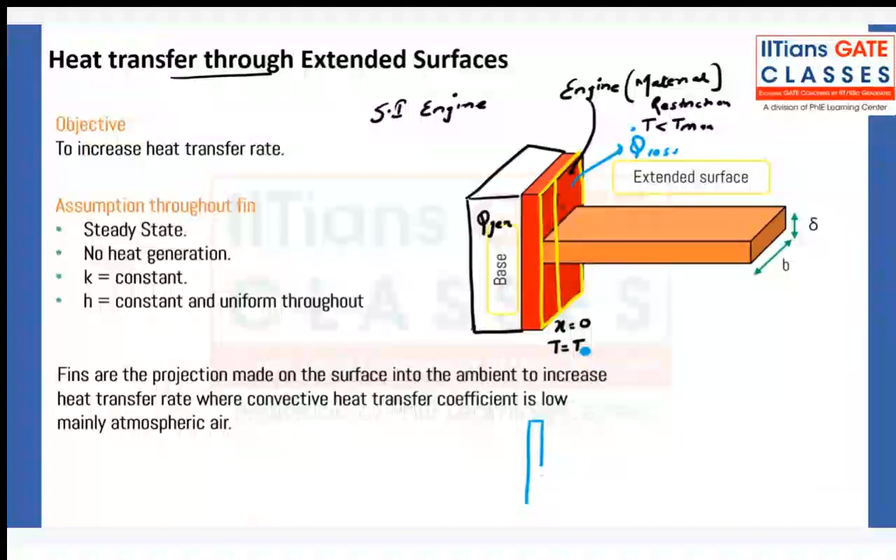How can you do that? By allowing the heat transfer to happen. Whatever heat is generated should be lost as heat, so that you maintain that body at a certain temperature T naught. This is what you want to maintain. So you can only allow this simple body - for example, this is your body - and let it allow the heat loss. The only area responsible for heat loss is this area.

Now, what can we do? We know conduction heat transfer is proportional to thermal conductivity, area, and temperature gradient. So we can increase the conductivity, but this engine is made of a certain material, so you cannot change the conductivity of the engine material. So what can you do? You can add an extended surface here like this, now using a material of higher thermal conductivity. So now conductivity is increased, area is increased, and heat transfer through conduction will increase.

So now the design of fins could be done in a way that it will allow the desired heat transfer - I need to transfer this much heat so I can maintain my temperature T naught. That is why you use extended surfaces, not just one - you use many surfaces here. I have made just one, but there will be a fin here as well, and another fin here as well. So many fins will be there.

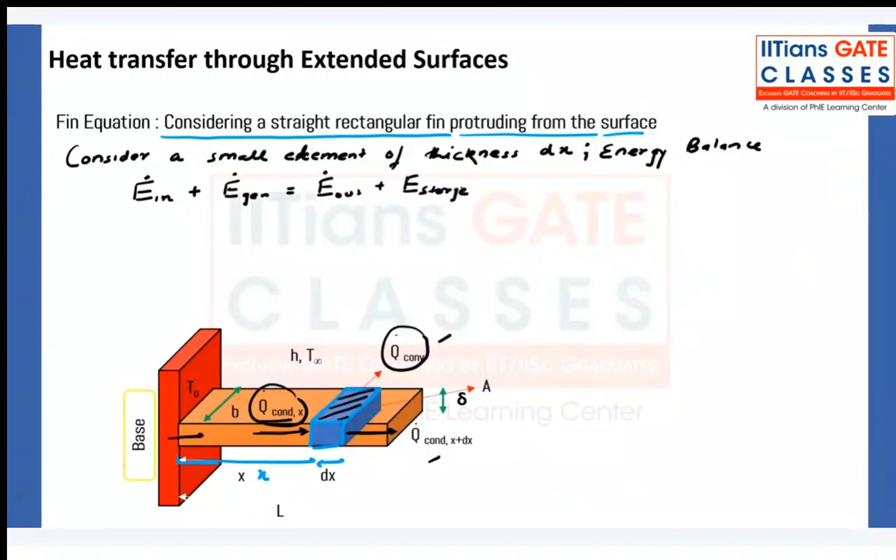Now we all know, we have assumed what? No heat generation. There is no heat generated inside the fin, so this is zero. And then we have assumed steady state, so that means there is no accumulation of energy inside the body, because if there is accumulation, temperature will change at that particular location.

So this is zero. Now we are left with energy dot in is equals to energy dot out. Now what is going in? Q dot x is going in. What is going out? Q dot x plus dx plus q dot convection is going out.

I can also expand this as q dot x, and this I can write as q dot x plus del by del x of q dot x, dx, plus q dot convection. So what do I get here? This and this get cancelled. This is del upon del x of q dot x, dx, plus q dot convection is equals to zero.

Now what can I do? I can expand this. How can I expand this? Del upon del x, it is conducted, what is it? It is only heat conducted that is coming in. So minus k, a, dt by dx, plus h, area. Now always remember, this is perpendicular area, this is the area of heat transfer, surface area. In this case it will not be the same.

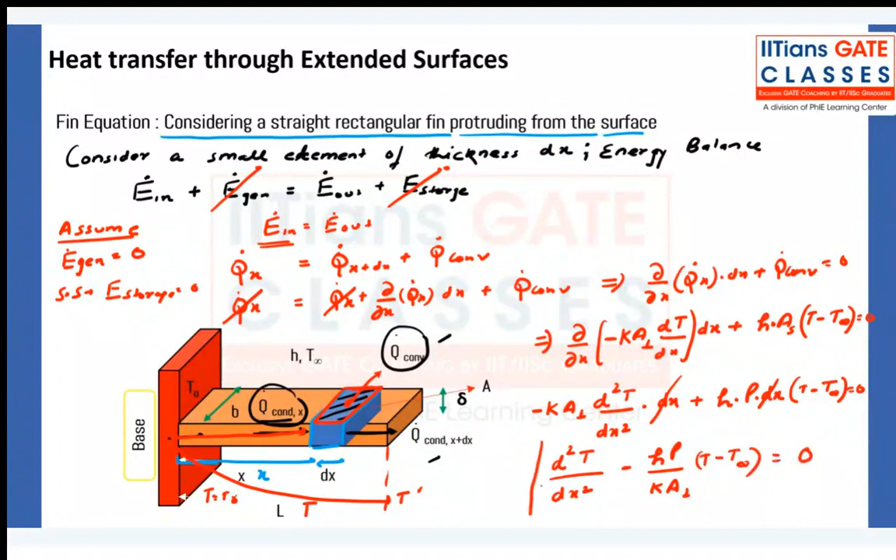Now tell me, do you have any problem with this equation? No, right? Okay, very nice. I have just rearranged the equation, divided everything by k, a, and also taken minus out. So I have just simplified it.

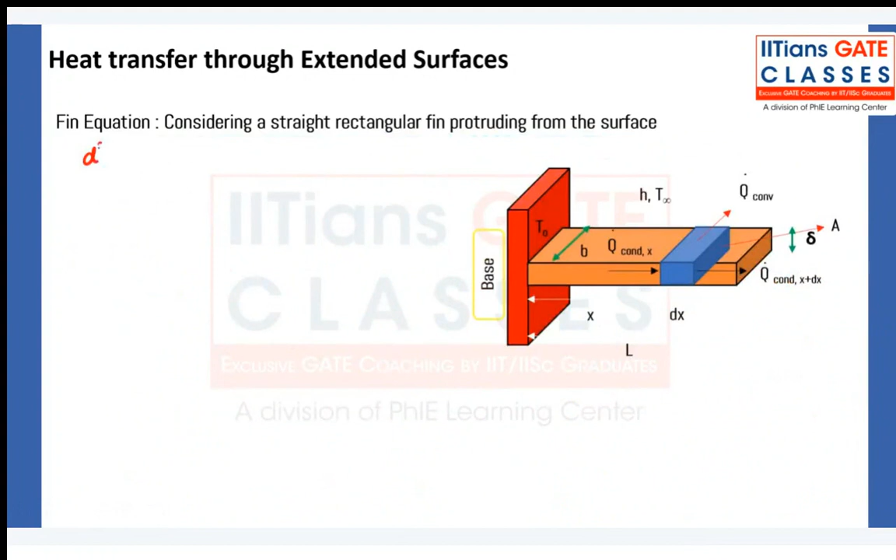Now let me take this equation ahead. So my equation is d square t by dx square, minus hp by k perpendicular area, t minus t infinity, is equals to zero. Very nice, very nice. Okay, chalo.

Now let us assume that t minus t infinity is equals to theta. This thing I have assumed as theta. Okay, chalo, I have assumed it theta.

Now if I differentiate this, dt with respect to dx, you see t infinity is independent of x. T infinity is the temperature of the fluid, whatever temperature the air is, it is the undisturbed temperature of the fluid. It is not affected by whatever heat transfer happens. You know the concept of thermal reservoirs, right? So air is a thermal reservoir. Whatever heat is absorbed by the air, the temperature of the air will not change.

The temperature of air will not change, so T infinity is constant, meaning dt by dx equals d theta by dx. I can also differentiate again: d square t by dx square equals d square theta by dx square. One more assumption I am taking: m square equals hp upon ka.

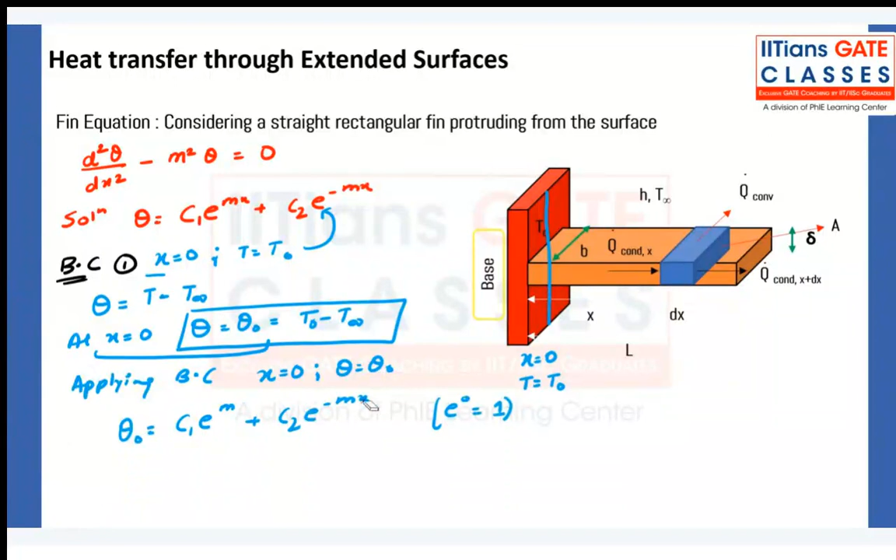Now we all know e to the power 0 is equals to 1. So I need to put 0 and 0. So this will become theta naught equals C1 plus C2. So whenever you use this boundary condition, this will be your equation A. Is this clear?

Now we have two constants C1 and C2, so I need one more boundary condition. Second boundary condition will depend on the type and design of fin. What kind of fin you are taking?

So the first boundary condition will remain same, and equation A will remain same. This equation will remain same. First boundary condition, which is either this or this, will remain same and equation A will remain same. Now the boundary condition 2 will vary depending upon the type of fin that you are using.

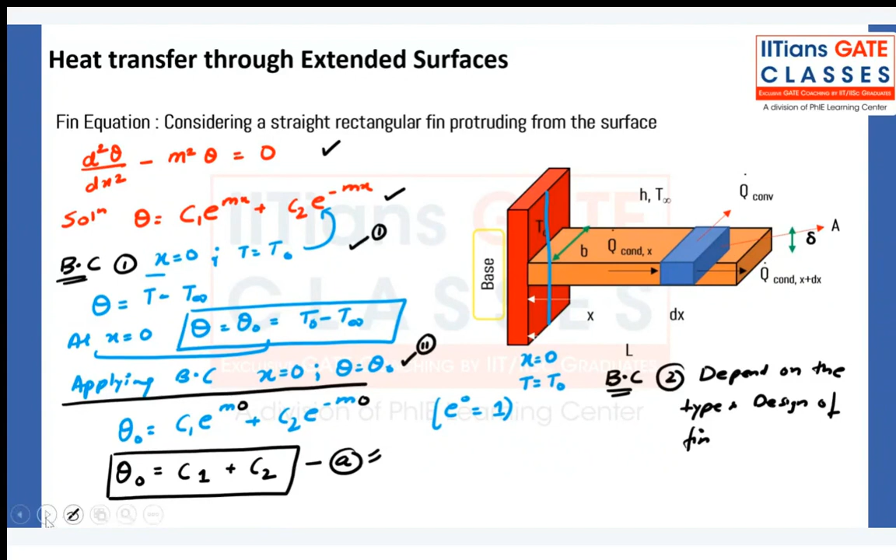Okay, this I don't need. This is the summary of what we have done till now. So this is my differential equation, and this is the theta that I have assumed, and m I have assumed this.

Okay, m key unit you will get when you put the units and cancel the units, you will get 1 by m.

Now this is the solution of this differential equation, and this is the common boundary condition that I have already shown you. The second boundary condition depends on the design of fin. By using the first boundary condition, I have already gotten the equation C1 plus C2, that is equation A. This is what we have discussed till now. Is it clear?

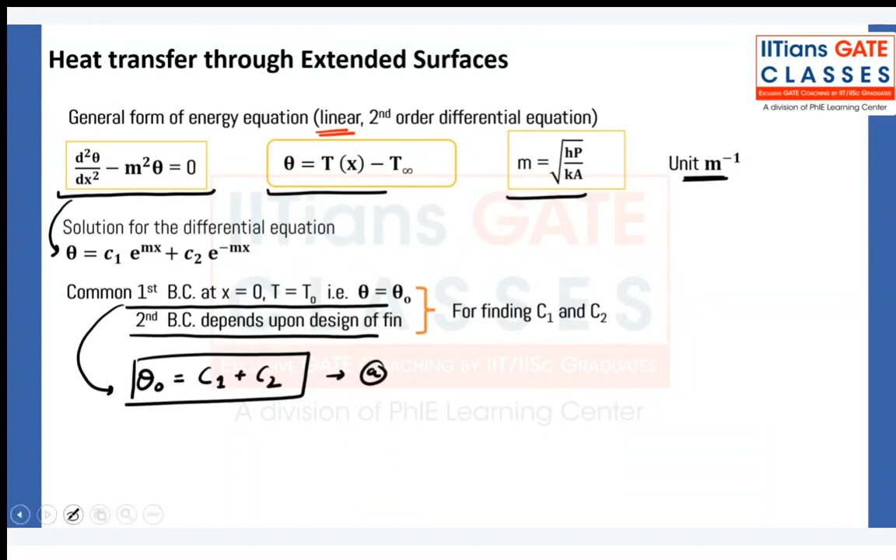Okay, now let's move ahead. Now I need the second boundary condition. So what will I do? That we will see later. But first I should know one more thing.

I know that m square is equal to hp upon ka. So m I can write as under root of hp by ka. So h and k will be given in the question, but I need to find out p by a.

Now two types of fin can be asked in the question: rectangular fin or pin fin. So if it is a rectangular fin, we all know what is the perimeter. Perimeter is 2b plus this, and area is b into this.

Now also what we can assume: if b is much greater than delta, then I can neglect delta.

What about pin fin? Again, perimeter by area. Perimeter is pi d, area is pi by 4 d square, or pi r square, whatever you want to call it. When you cancel this, perimeter per unit area is equal to 4 by d.

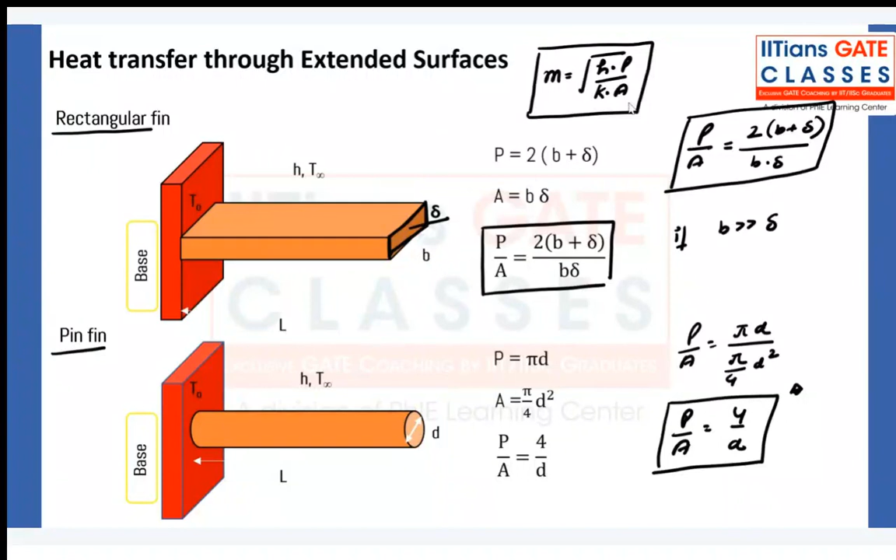Now let us move on to the second boundary condition, that depends on the design of the fin, what kind of fin you are using.

Now the first case is infinitely long fin. So what is happening, sir? This is your body, and this is your fin. Now this fin is very long.

Here I know, at this surface x is equal to 0, t is equal to t naught. But as this length is increasing, conduction is happening, convection is happening, conduction is happening, convection is happening. Now when your length is infinite, that means all the heat transfer will be given away to the environment.

So what will be the temperature here? Tell me. Yes, very nice, T is equal to T infinity. All the heat is rejected because of infinite length. So at the end, at this point, x is equal to infinity, length is infinity, and T is equal to T infinity. Very nice. So now what will we do?

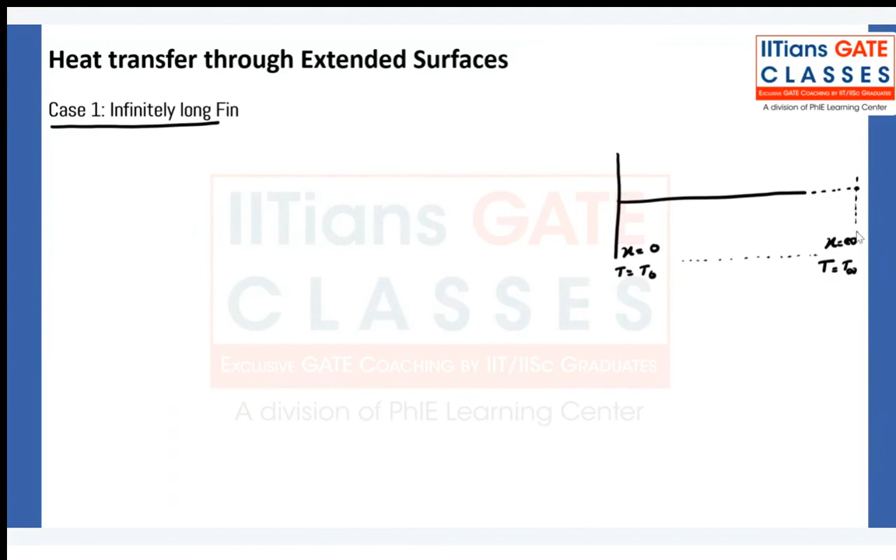We'll start with the basic equation. What is the basic equation? You should remember this as it is. I have solved it for you, but you need to solve it as many times so that it is remembered by you just like this. Okay, this is my differential equation.

Solution. What is the solution of this? Theta is equal to c1 e to the power mx plus c2 e to the power minus mx. Now I need to find out c1 and c2, m square.

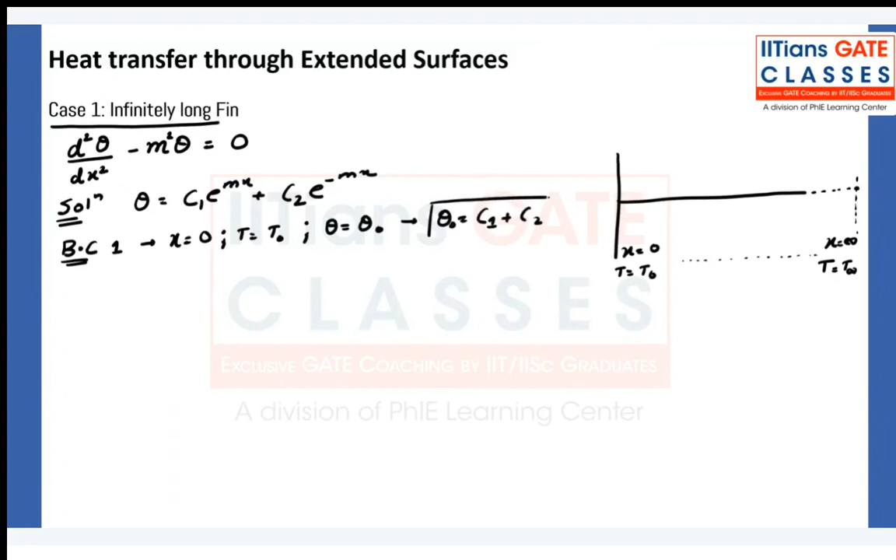Okay, so I need to find out C1 and C2. I'll apply the boundary conditions. First boundary condition: at x equals 0, t equals t naught. Theta is equals to theta naught, and the equation I get is theta naught equals C1 plus C2. This is equation A.

Now the time has come for the second boundary condition. Boundary condition 2: at x equals infinity, T equals T infinity. Now what is theta? Theta is equals to T minus T infinity. So how much will theta be in this case? Zero, yes, it is zero.

Theta will be 0. Let me apply this boundary condition in the solution. Theta is equals to 0, C1 e to the power mx infinity plus C2 e to the power minus m infinity. So e to the power infinity, what is this? Any power of infinity of anything will be equal to e to the power infinity, which will be infinity. And e to the power minus infinity is 0.

So I'll get 0 equals C1 times infinity plus 0. So C1 equals 0 upon infinity. Anything divided, if the numerator is 0, whatever you divide with, it will be 0. So C1 is equals to 0.

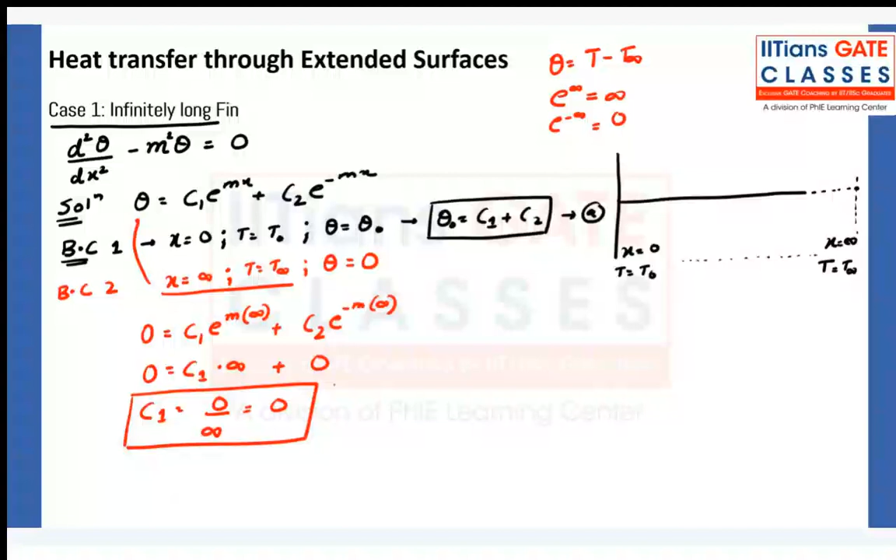Now what can I do? I can put C1 here, and C2 is equals to theta naught. So now I got C1, I got C2, I can place it here in the solution. Let me put C1 and C2 into the solution.

This is theta itself. C1 is 0, plus theta naught e to the power minus mx. So theta upon theta naught is equals to e to the power minus mx. This is basically your temperature distribution equation. Why? Theta is equals to T minus T infinity, and theta naught is T naught minus T infinity, is equals to e to the power minus mx.

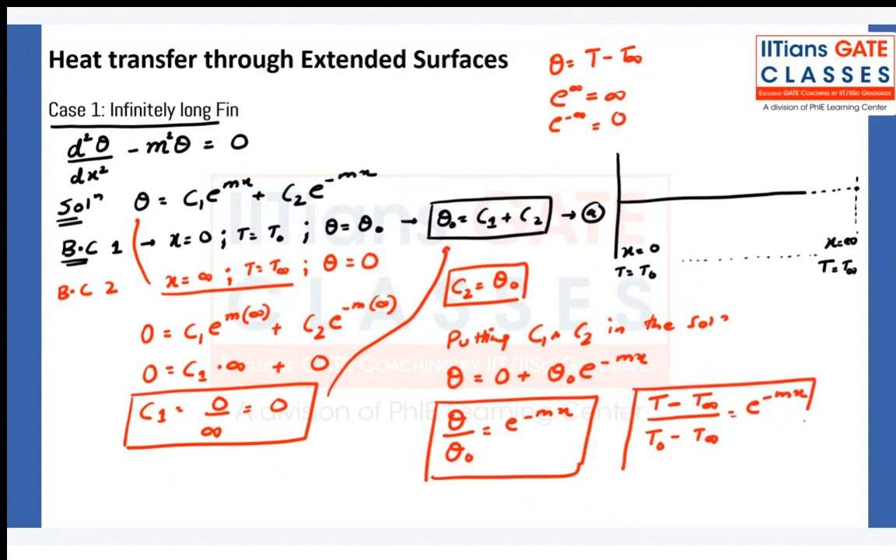So this is your temperature distribution equation for infinitely long fin. Is it clear? Okay, so this is my temperature distribution equation for infinitely long fin. Now I need to find out the heat transfer. So what is the heat transfer? I need to find out this.

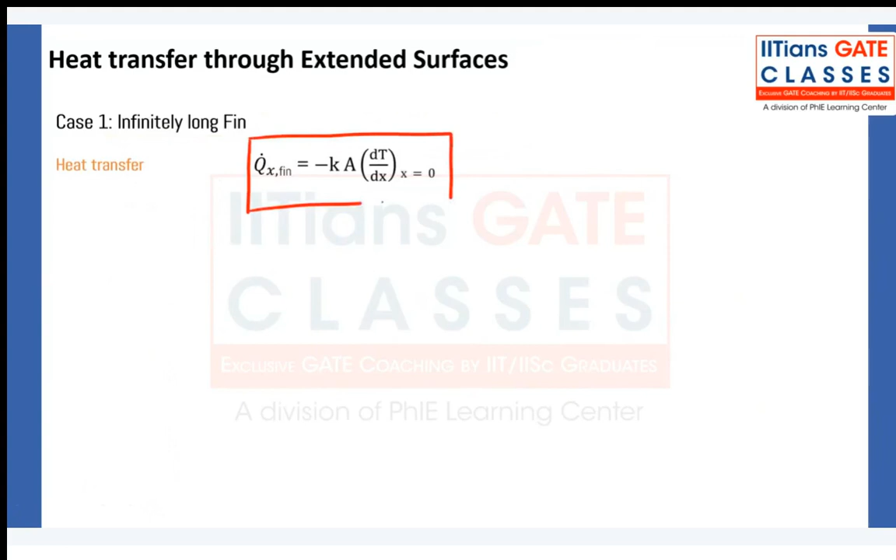How much heat is getting transferred at x equals 0? At this body, at x equals 0, how much heat is conducted? How much heat is coming in, how much heat is conducted in the body? Q dot conducted in the fin. So whatever is conducted will either be convected here or convected here, and in the whole body it will be conducted.

Yes, I can. Yeah, this is the last slide. Any doubts, Sahil? Okay, let us move on then.

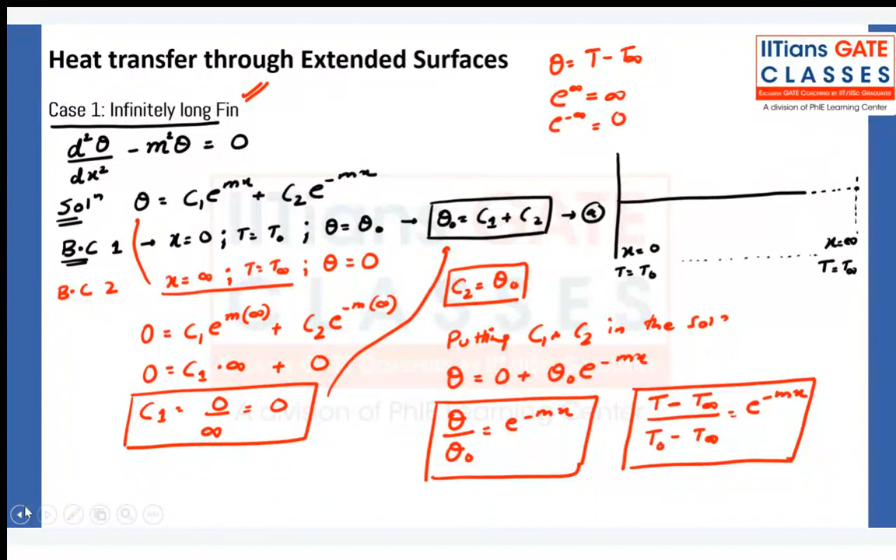So in order to find out heat transfer, I need dt by dx at x equals 0. How do I find out? Look, this is my temperature distribution equation. Can I say theta is equals to theta naught e to the power minus mx? Or can I also say T minus T infinity is equals to T naught minus T infinity e to the power minus mx? From here I can find out temperature: T infinity plus T naught minus T infinity e to the power minus mx. Now I need to find out dt by dx.

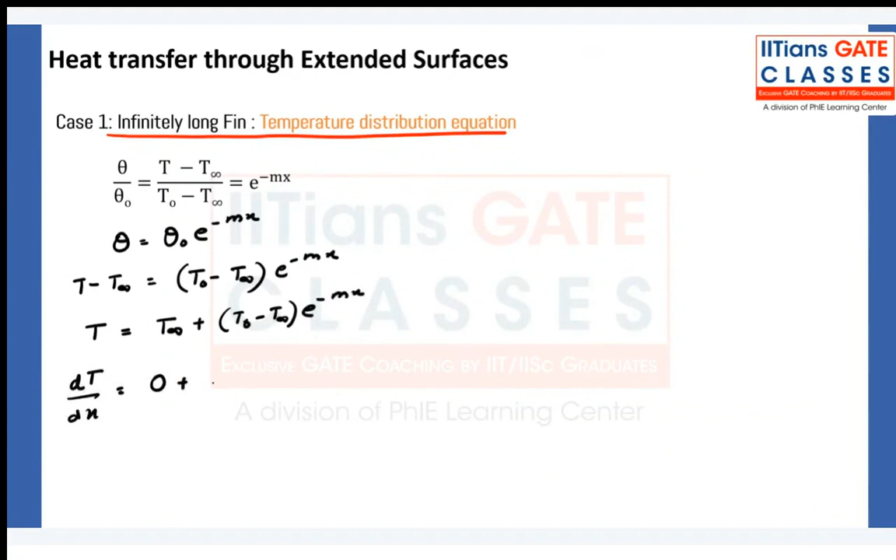This is constant only, so this will be 0. Now I need to differentiate this: T naught minus T infinity e to the power minus mx. What will you get here? Tell me quickly, what is the differentiation of this? Yes, very nice, minus m. So dt by dx is equals to minus m. Now can I write theta naught here? Yes, I can write theta naught e to the power minus mx.

Now in order to calculate heat transfer, what do I need? I need dt by dx at x equals 0. So what will I do? Minus m theta naught e to the power minus m times 0.

Okay, so what is the value of this? E to the power 0 is 1. You will get dT by dx at x equals 0 is equal to minus m theta naught.

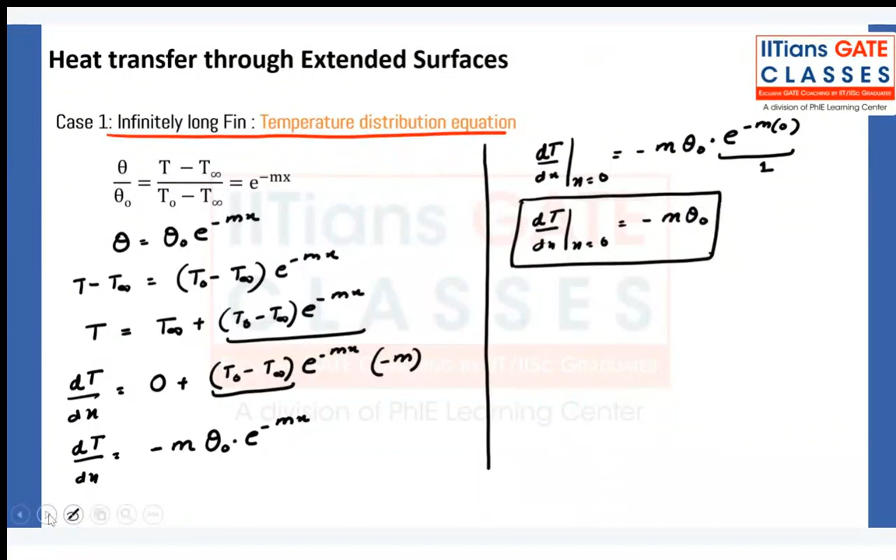Okay, so this is what I have gotten. Now I can just insert it here. So if I need to find out qx of fin, which is conduction heat transfer, minus kA, and this is what I got, minus m theta naught.

We have calculated dT by dx at x equals 0 is equal to minus m theta naught. Now this is plus kA. M is what? M is under root hP by kA, and this is theta naught. So if you cancel this, you will find out under root hP kA theta naught.

Let me write theta naught in terms of temperature because it is more convenient for us, because we know things in terms of temperature: T naught minus T infinity. And this is how you can calculate heat transfer in infinitely long fin. Unit is watts. Is it clear?

Yes, very nice, very nice. Chalo, let us move on to the next case.

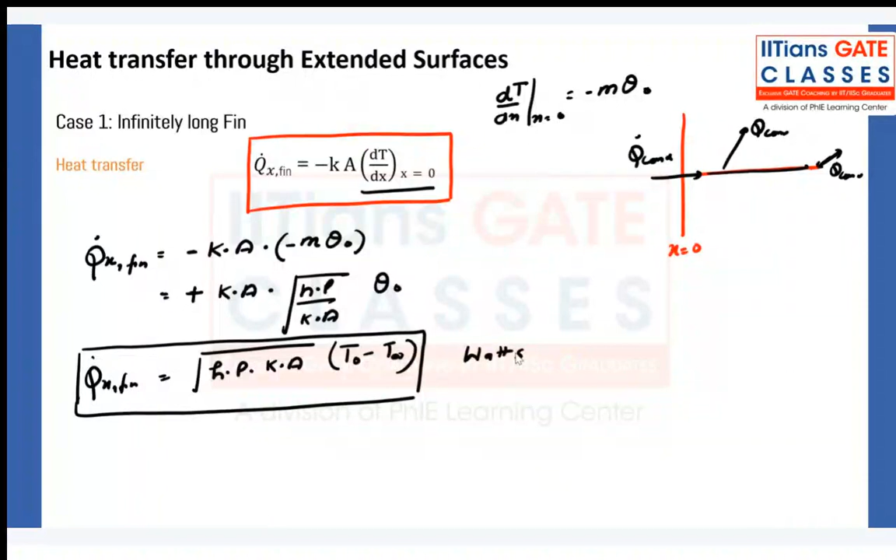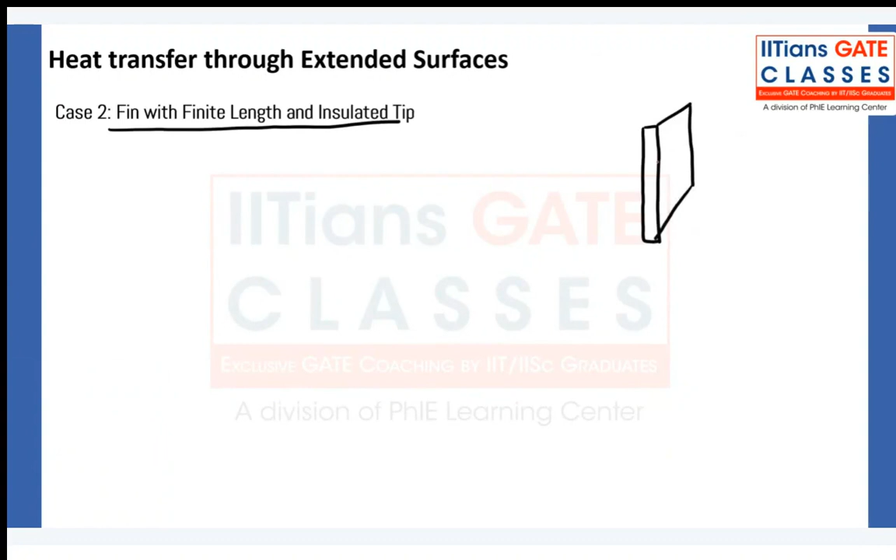So, fin with finite length and insulated tip. What does it mean? Look, this is your body, whatever body it is, engine body or whatever, and you have taken a fin here. Now, finite length means, look, here I know, here I am very sure x equals 0, T equals T naught. And when finite length means x equals L, so now the tip, this tip is insulated.

That means because it is insulated, so Q dot conduction will be equal to 0. Now what is Q dot conduction? Minus kA dT by dx at x equals L is equal to 0. So at x equals L, dT by dx is equal to 0.

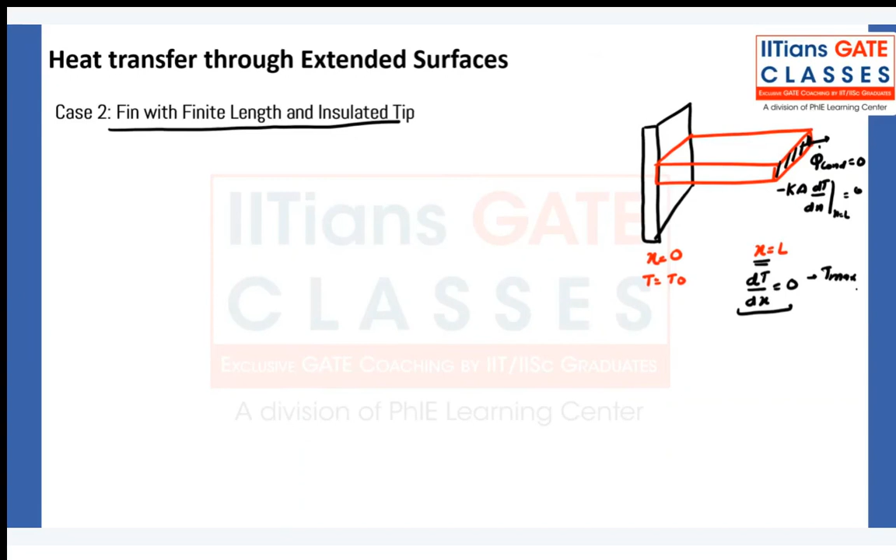And what do we know about this? Here you will also get the maximum temperature. Here, yes, no heat transfer, but the temperature will be maximum because this is the condition. At dT by dx meaning the variation of temperature with respect to x, where dT by dx equals 0, you will get Tmax as well. So you already know the location of your Tmax.

Okay, chalo. Now, so let's start from the beginning. So write the equation again: the differential equation was d squared theta by dx square minus m squared theta equal to 0. What is the solution of this? Solution is theta equals c1 e to the power mx plus c2 e to the power minus mx. Okay, let us apply boundary condition.

First boundary condition: x equals 0, T equals T naught, and theta equals theta naught, and we have gotten theta naught is equal to c1 plus c2. This we already know, no discussion needed for this. Now the second condition.

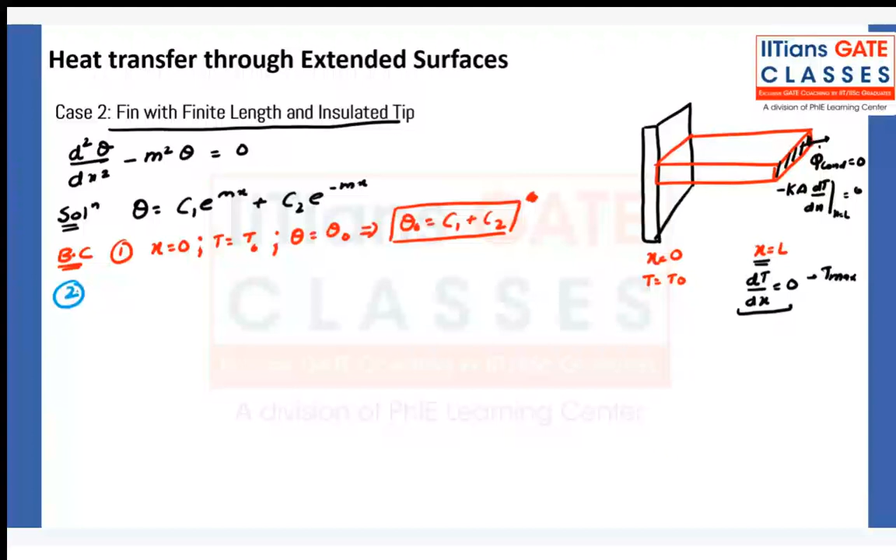Second boundary condition is at x equals L, dT by dx is equal to 0. Can I also write it as d theta by dx equals 0? Any problem? Okay, very nice. Before we move ahead, let me tell you one more thing.

Look, if nothing is given in the question about what type of fin, we will cover 3 cases of fin. Next will be uninsulated tip. But if nothing is given in question, then you assume that this is the case you have to assume, otherwise they will say infinitely long fin, or otherwise they will specifically mention something. If nothing is mentioned, then you assume it is this fin, and you start making calculations according to this. So it's very important that you focus on this.

Now chalo, now I need to find out d theta by dx, and I need to put it equal to 0. Then I will get c1 and c2. Okay, chalo, theek hai, so differentiate this. Let's say d theta by dx equals m c1 e to the power mx, and because minus m will come outside, so let me write it here, minus m c2 e to the power minus mx. Is it okay?

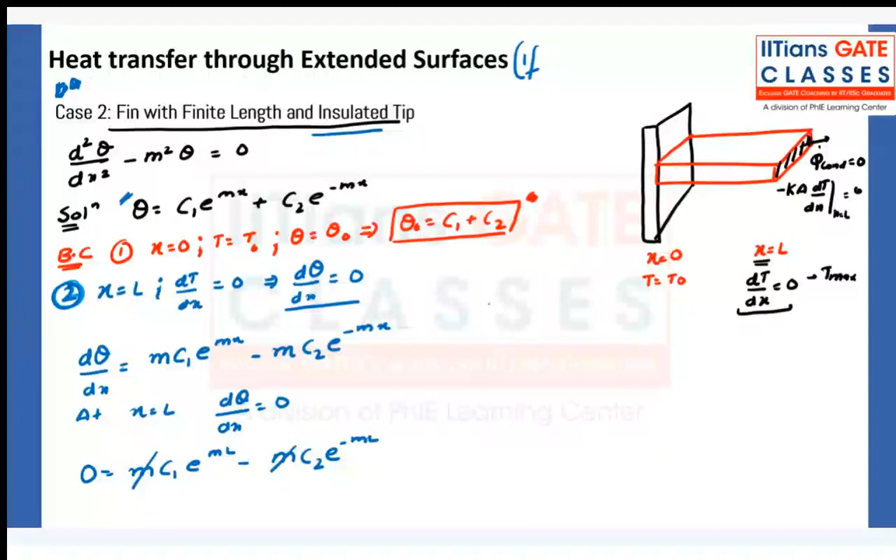Now m you can take common and it will go out and get cancelled. What am I left with? I am left with C1 e to the power mL minus C2 e to the power minus mL is equals to 0. This is what I am left with. Is it clear?

Now I need to find out C1 and C2. Now because it's one equation, two unknowns, but I already have one equation: theta naught is equals to C1 plus C2, by applying boundary condition 1. So can I say C1 is equals to theta naught minus C2? I can say this, right? So let me substitute it here.

Theta naught minus C2 e to the power mL minus C2 e to the power minus mL is equals to 0.

Now you can take C2 out, simplify it, and you will get C2 is equals to theta naught e to the power mL upon e to the power mL plus e to the power minus mL. This is what you will get for C2. And when you substitute C2 here, you will get C1 is equals to theta naught e to the power minus mL, and the denominator will remain the same. Is it okay?

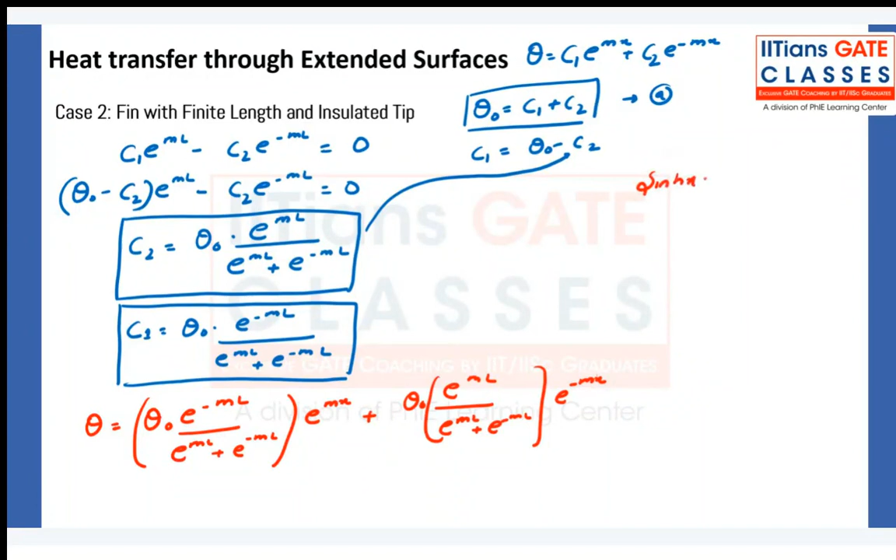We know sine hyperbolic x is equals to e to the power x minus e to the power minus x by 2, and cos hyperbolic x is equals to e to the power x plus e to the power minus x by 2. And for tan hyperbolic, you can simply divide them, and you will find e to the power x minus e to the power minus x upon e to the power x plus e to the power minus x.

So I can simplify my equation in terms of cos and sine. If I change the exponentials into cos and sine, I will get theta, and theta naught you can take out from this equation.

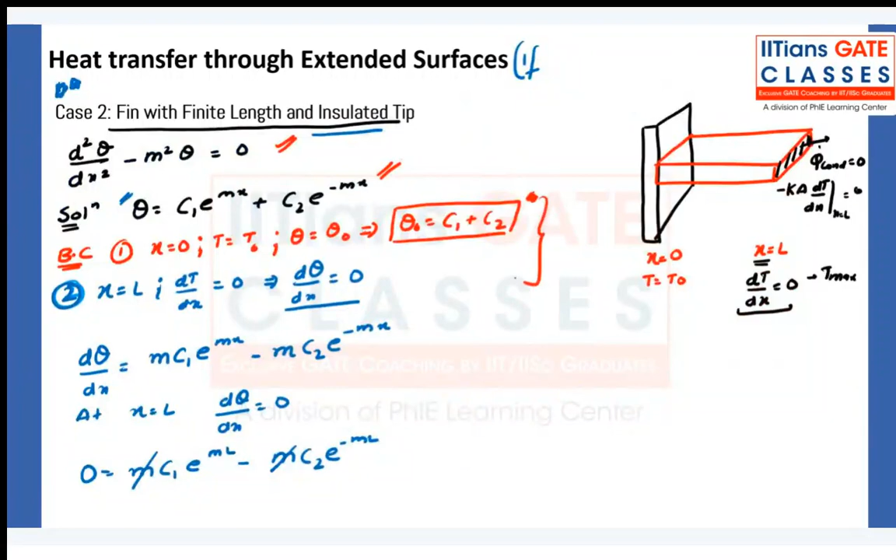So theta upon theta naught is equals to cosh m(L minus x) upon cosh mL. This much is more than enough for you. If you know what the boundary conditions are, you do not even need to remember the constants, you do not need to remember this. Only the differential equation, its solution, and these two boundary conditions. After that, you need to know this temperature distribution equation. Is it clear?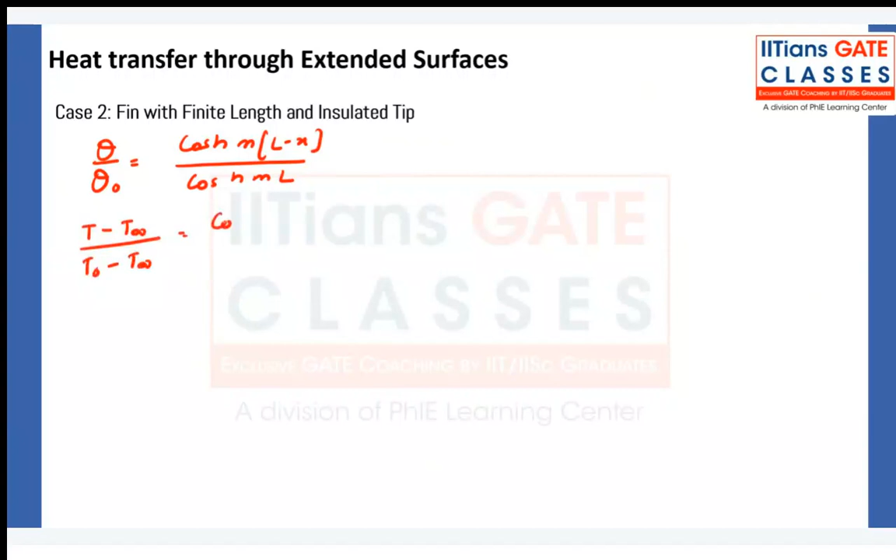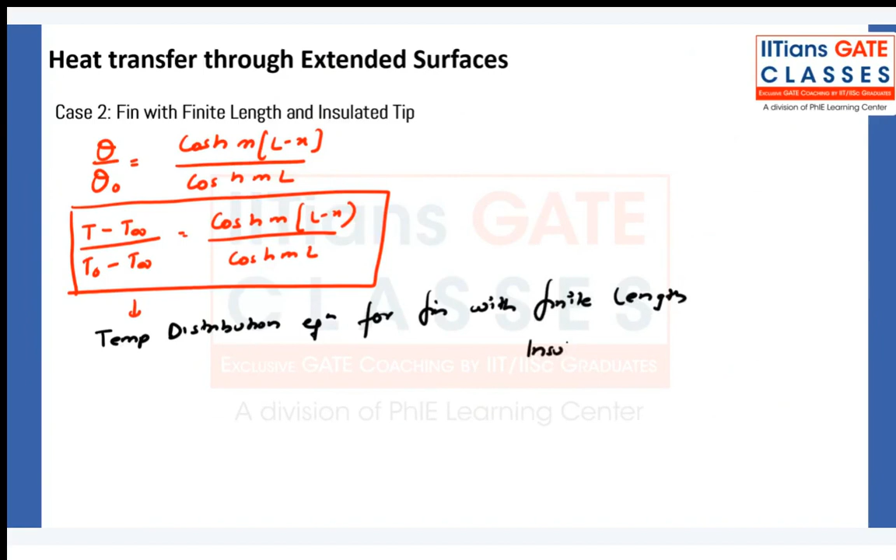So what do I get? I get theta upon theta naught is equals to cosh m(L minus x) upon cosh mL. And I can also write t minus t infinity upon t naught minus t infinity is equals to cosh m(L minus x) upon cosh mL. Now this is my temperature distribution equation, for fin with finite length and insulated tip. Only in these conditions can you use this boundary condition. Is it clear?

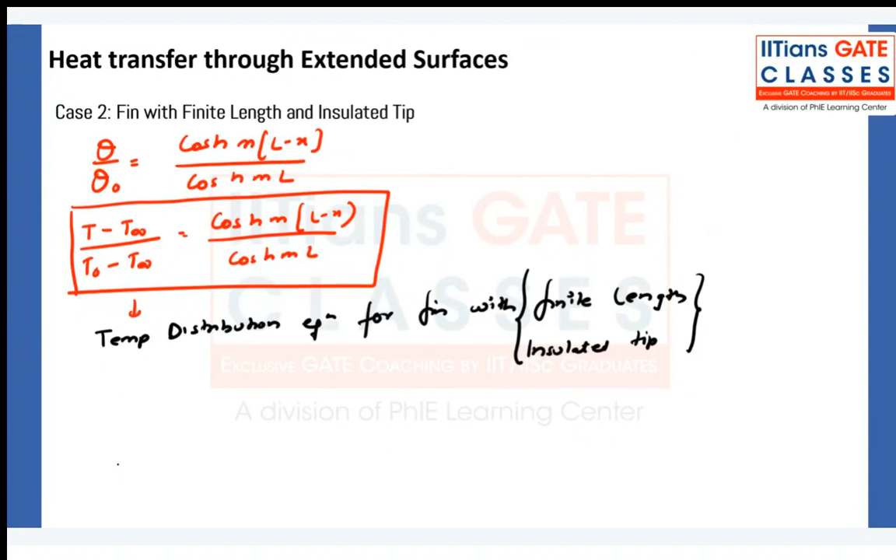So as we know, this is my boundary, this is my temperature distribution equation. Now again, like we did previously, I need to calculate heat transfer - how much heat is getting transferred at x equals 0. So what will I do? I need to find out dT by dx at x equals 0, so that I can substitute that in the heat transfer equation and calculate the heat transfer. In a question, you need to directly calculate using that formula.

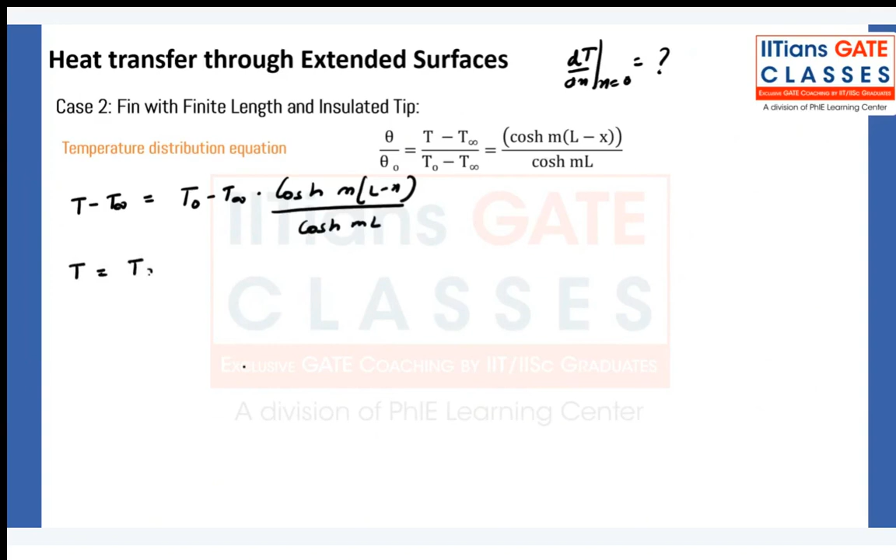So I can write T naught minus T infinity cos h m(L minus x) upon cos h mL. I can also write T equals T infinity plus T naught minus T infinity cos h m(L minus x) upon cos h mL.

Now let me differentiate dT by dx. This term will become zero, plus it will remain same because it is in product, but it is a constant. Now, can you tell me what is the differentiation of cos h m(L minus x)?

Cos hyperbolic m(L minus x) differentiates to sin h m(L minus x) into m or into minus m? Yes, minus m, very nice. And this is constant, this is same. So what can I do? Can I write dT by dx equals minus m theta naught sin h m(L minus x) upon cos h mL? I can write this - any doubt? Is that okay?

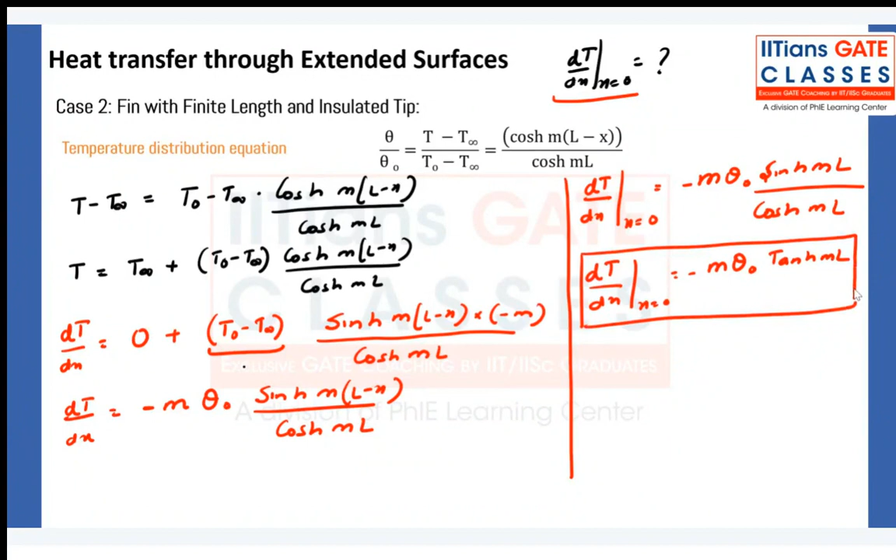Now this is what I need, so let's move ahead with this. I need to put this here. So what do I get? dT by dx at x equals 0 equals minus m theta naught tan hmL. This is what I have found out.

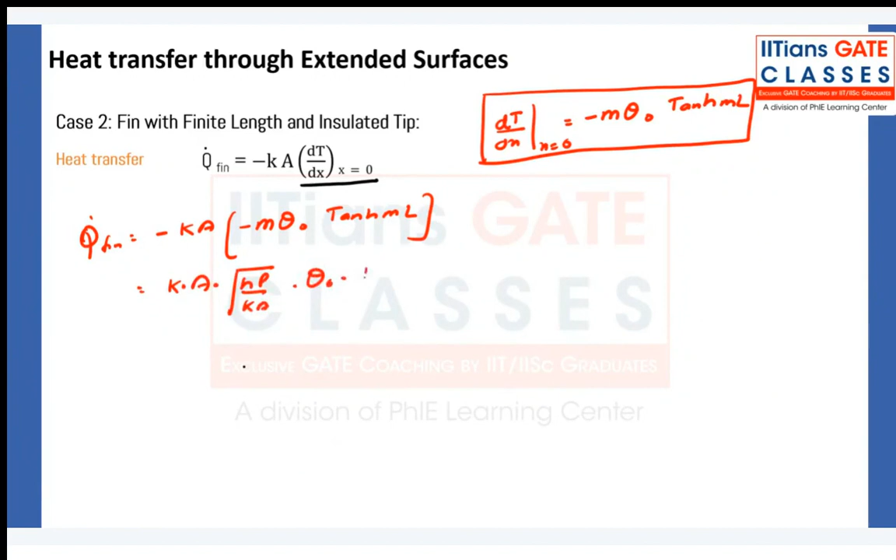So let me put this here. Q dot fin equals minus kA, and this is minus m theta naught tan hmL. So this is kA. M is under root hP over kA. So under root kA is there in the denominator, numerator is kA. So when you divide this, you will get under root hPkA theta naught tan hmL as Q fin.

And this is given in watts. So whenever you see a question on fins asking for heat transfer, use this equation. H will be given, K will be given, perimeter and area I have already told you the formulas for. Theta naught is T naught, meaning base temperature - it will be given to you. Theta naught equals T naught minus T infinity. So T naught is the base temperature, base material temperature - something like this they will give in the question. T infinity is ambient or fluid temperature, which will also be given in the question.

Calculate m. M equals under root hP over kA. P by A you know - I have given you the formulas - and length also you know. You can calculate heat transfer. Is this clear? Okay, very nice, very nice.

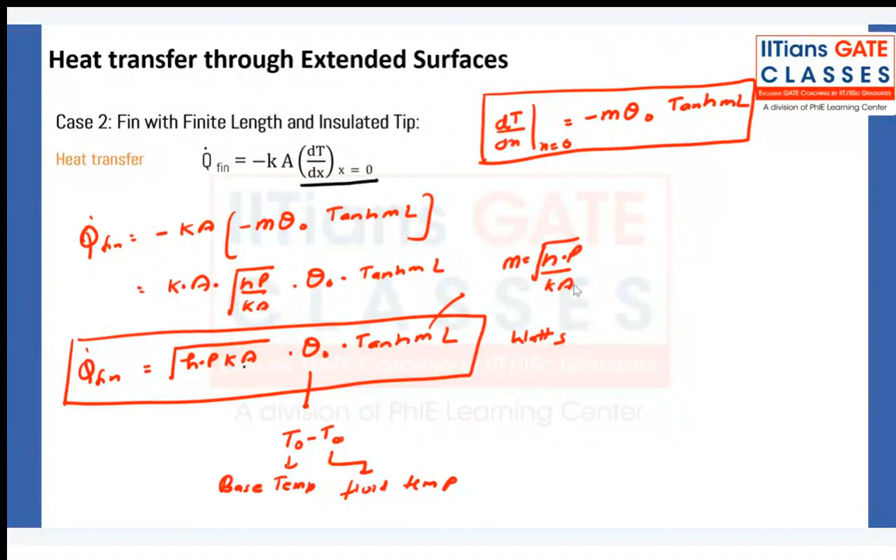Chalo, now the last case is fin with finite length and uninsulated tip. Now this case is very rarely asked. Most frequently, case second is asked - most frequently, so this is the first priority. Second priority is case first. And third is very rarely asked.

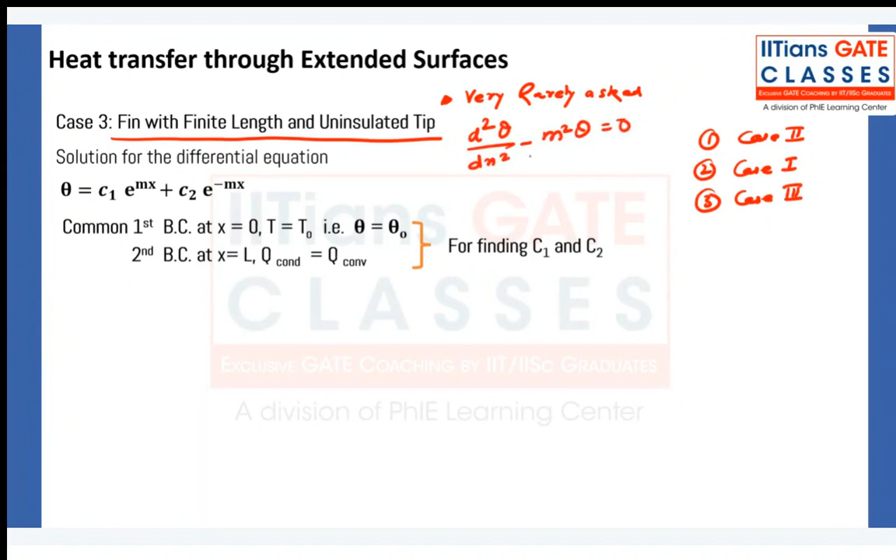Fin with finite length and uninsulated tip. So we already know that the differential equation is d square theta by dx square minus m square theta equals 0. This is my differential equation, and the solution of this equation is this. Boundary condition I already knew, and the second boundary condition is simple - this is my base material, and now this is my fin.

Now we know that here at x equals 0, T equals T naught. But at this point, x equals L, what is happening here? You see, conduction heat transfer is happening like this, and it is steady state conduction. In steady rate of heat conduction, rate of heat transfer will remain same. So at this point, whatever is conducted at this location, will be, because here we have fluid.

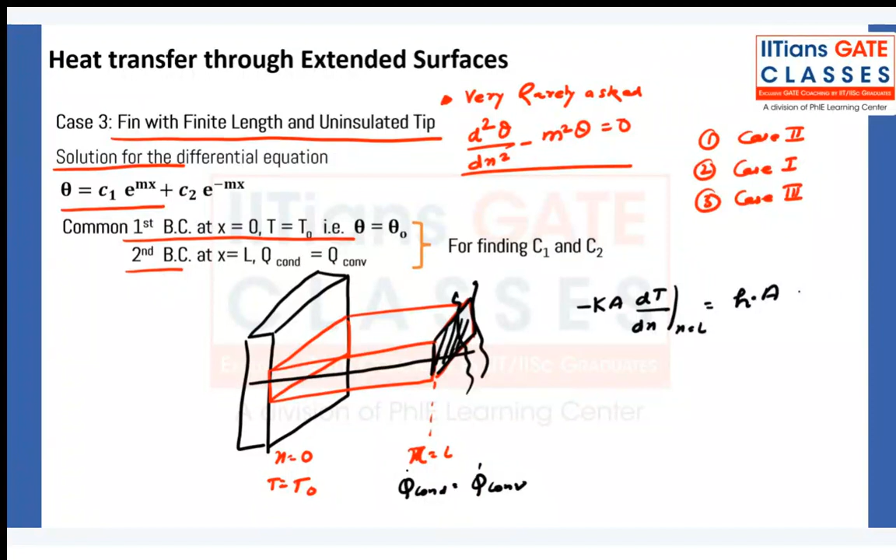Here we have fluid, so Q dot conduction equals Q dot convection. Now you can write the formula: minus KA dt/dx at x equals L, equals H times area. Now area will remain the same in both cases because this is the same area which is in contact with the fluid, and it is also the conduction area. Then T at L minus T infinity. So area cancels, and dt/dx at x equals L equals H upon K theta naught minus... something like this you can do, but it is not required.

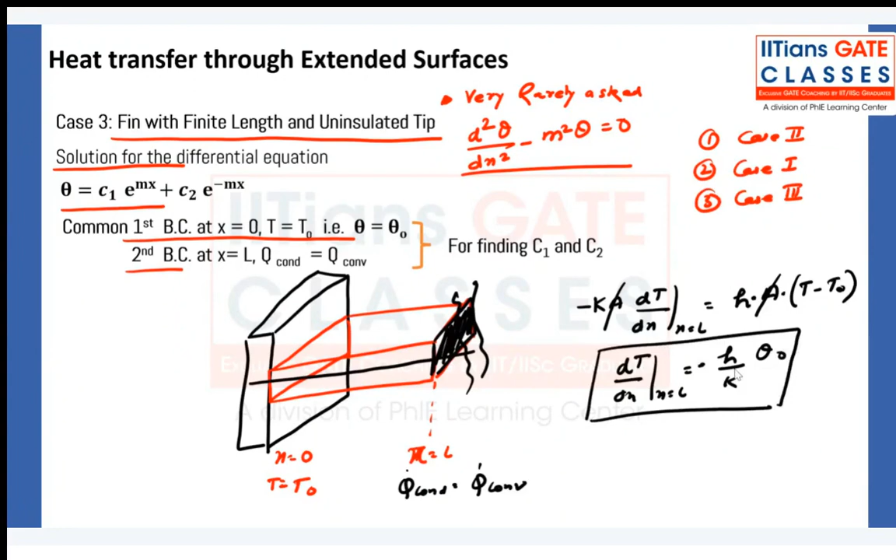A lot of derivation is needed for this, but that again is not required for us. And eventually, even after that, we will reach a very complicated formula. So what we do in order to simplify the analysis...

What will we do? We use the same temperature distribution as we used earlier for this uninsulated tip case. So we will do the same thing we did earlier.

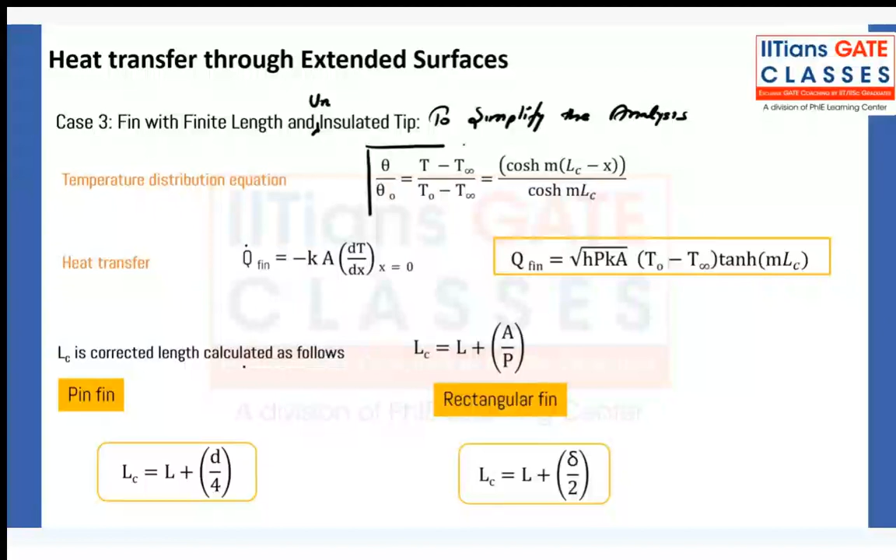So this was my temperature distribution equation. Only instead of L here and L here, I am using LC, which is called the corrected length. How we will calculate corrected length, we will see in some time. Now this is my temperature distribution equation.

This is my heat transfer equation, same as before, and this is the formula we calculated for the insulated tip, only here I have replaced L by LC. Now how do you calculate LC? LC is L plus A by P, area by perimeter, and we have already calculated perimeter by area earlier for rectangular fin and pin fin. So the same thing you can use here.

But just take care, you need to use LC. Very rarely this type of question will be asked, but even if it is, this much information is more than enough to solve it. There is no need of doing the derivation, and anyway, even if we do the derivation, in the GATE exam we do not use that formula we get after derivation, so there is no point.

Next is fin efficiency. We always know what efficiency means for anything: how close is it to the ideal condition? So fin efficiency equals Q actual over Q maximum. What is the actual heat transfer, and what is the maximum heat transfer possible?

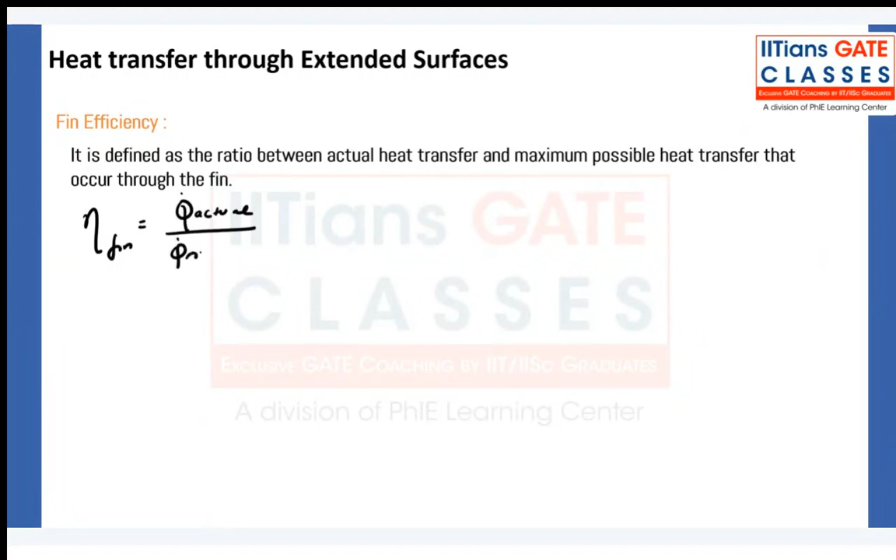Now you see here, look - this is your material, this is your base material. Okay, I don't need that, so I won't draw this.

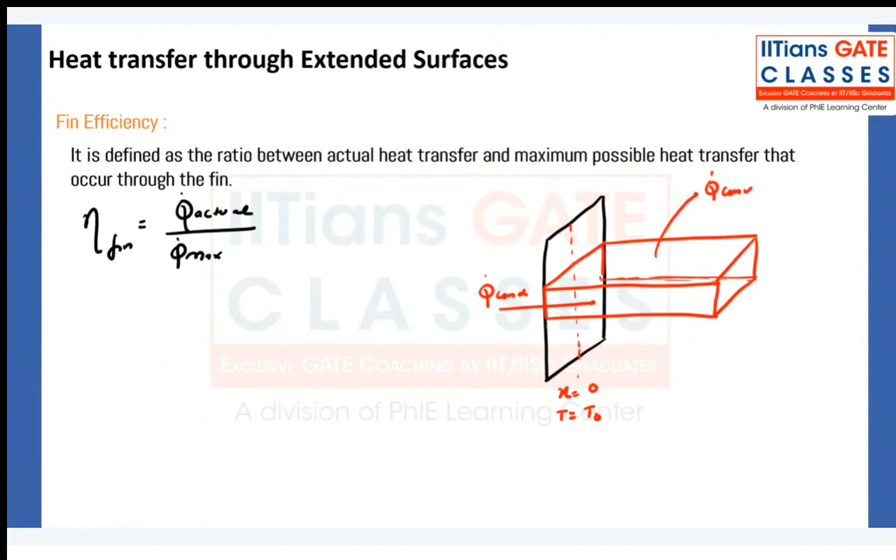So this is my fin. Now here, at this point at x equals 0, temperature is T naught, which is... not maximum temperature, but usually, because heat is going out - first heat is conducted, Q dot conducted, and heat is convected as well, Q dot convected. So what we do is say that heat is basically related to temperature: if here temperature is T naught, then temperature reduces as you move along, let's say it becomes T1, so T naught is greater than T1 usually.

So when will you get the maximum heat transfer? You see temperature is reducing. But what if the whole fin everywhere was at temperature T naught - then the same amount of heat will flow as with base temperature everywhere. Then you will get the maximum heat transfer.

So Q dot max is defined by assuming the entire fin is at root temperature, or base temperature - it is called base temperature, T naught. We assume it is at T naught everywhere.

Now, when will this happen? When can this situation possibly occur? It is possible only where... so in order that the temperature is T naught everywhere, would the conductivity need to be very high or very low?

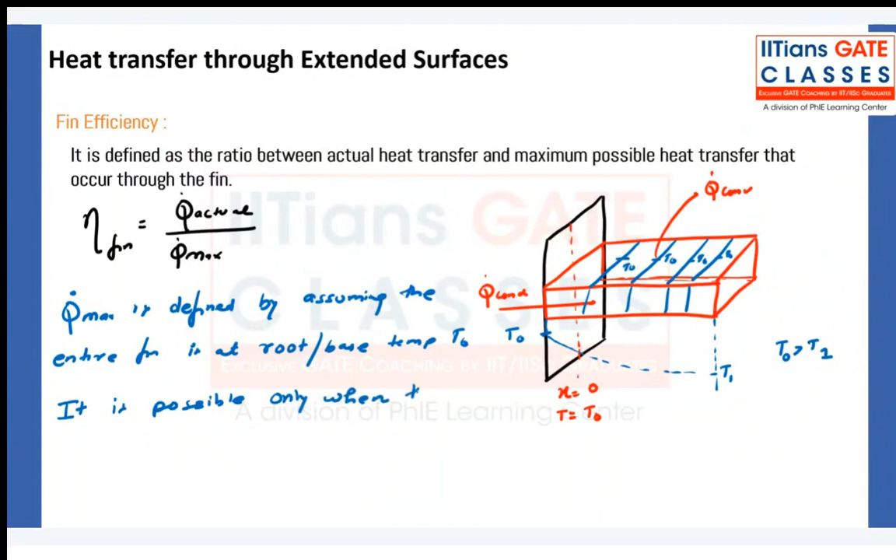Only when thermal conductivity is... no, we assume thermal conductivity as constant. But because temperature is reducing, heat transfer will change. So there will be heat transfer. Q dot conduction equals minus Ka dt by dx. So this is changing, temperature with respect to dx is changing. So it can only happen due to conductivity of the material. We assume in the analysis that conductivity is not changing with respect to x.

Now conductivity must be infinite, very very high conductivity, so that heat transfer... conductivity will be infinite so that there will be very fast heat transfer. And if the heat transfer is very fast, that means you will not get enough time for the reduction of temperature. Heat will flow very fast in the body. It is possible only when thermal conductivity K is infinite, but that is not possible anyway.

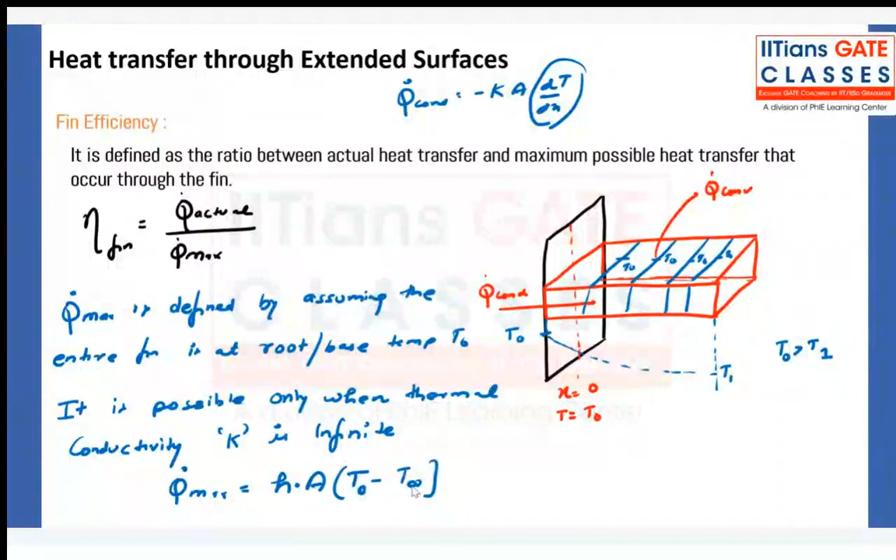Now, how do you calculate fin efficiency in the first case, which is infinitely long fin? I know that efficiency of fin is defined as Q dot actual upon Q dot maximum. We have just calculated heat transfer for infinitely long fin. What was it? Under root h p k a, times T naught minus T infinity.

And this Q max is h area T naught minus T infinity. So this will get cancelled. Now this area, if you remember, is perpendicular area with heat transfer, because when we defined q convection equals h a times T minus T infinity, area we took as perimeter by dx, and dx was cancelled. So this area is the perpendicular conduction area. And this area is different - this area is perimeter into dx. Now because we are talking about the whole fin, it is P into L.

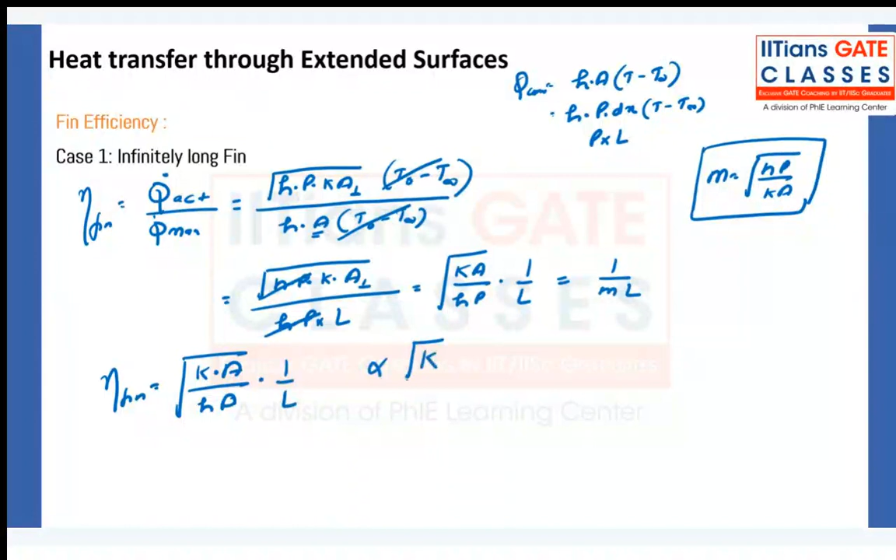Okay, very nice. Now let me write this formula one more time: is equals to under root Ka upon HP into 1 by L. So you see, efficiency is directly proportional to root of thermal conductivity, inversely proportional to heat transfer coefficient, and directly proportional to area by perimeter. Keep this in mind, we will discuss this later. And 1 by L. This is efficiency.

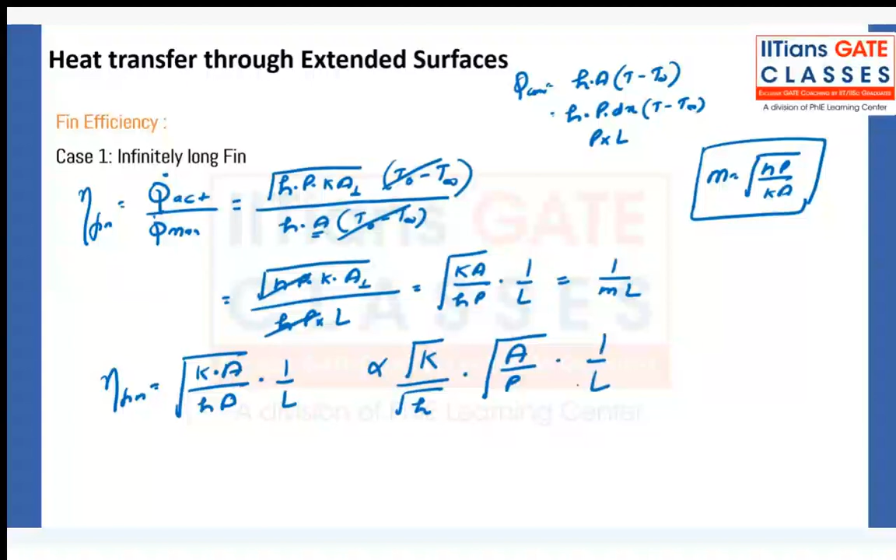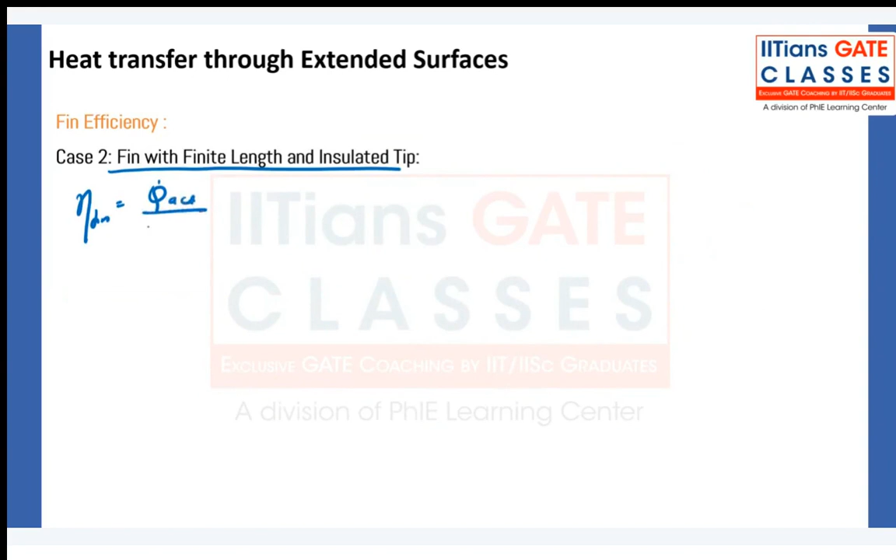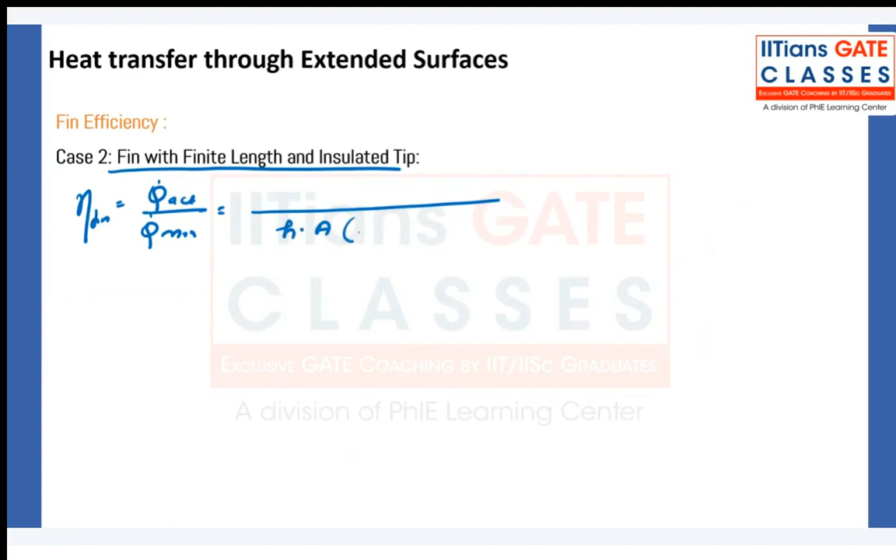Now, what about fin with finite length and insulated tip? Efficiency of fin is defined as Q dot actual upon Q dot maximum. Can you tell me what is Q dot actual for this case? I will write this H area T naught minus T infinity. Tell me very quickly - you will get a revision again here itself. What is the heat transfer actual in this case?

Let me read it: under root H P K A, yes square root HPKA. That seems correct, yes, that seems correct. Right, for both it is correct. Then T naught minus T infinity, which is theta naught as well, and tanh ML. Tanh ML, yes right, that is correct. So HPKA and T naught minus T infinity tanh ML. So again this I can cancel, length I will still be there. HP and HP will get cancelled, and I'll get tanh ML upon ML. So efficiency of fin equals tanh ML upon ML.

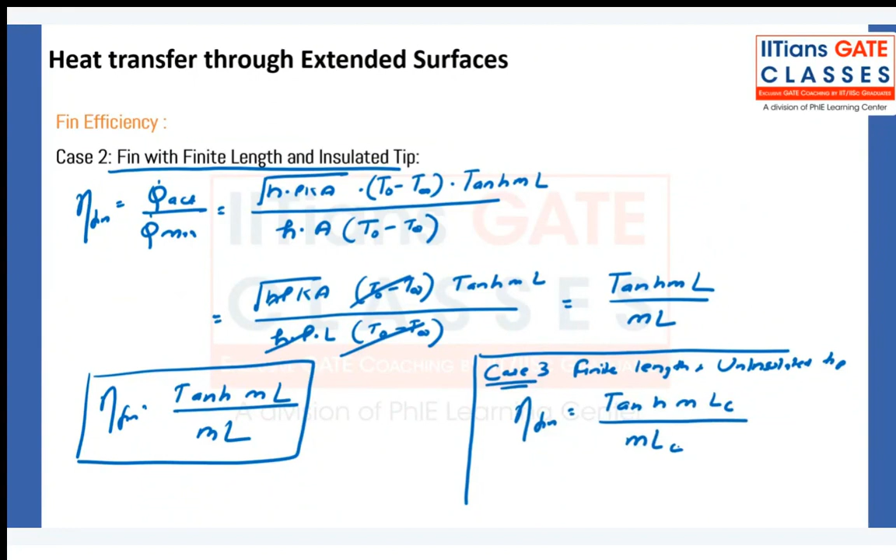Simple, okay. Let us move on to the last topic, which is fin effectiveness. Then we will see whatever questions they have asked till now.

Fin effectiveness tells us how much percentage increase. What does effectiveness mean? If I was doing something and then changed my routine, or changed my diet - for example, I am going to gym and my exercises are not very effective, so I changed the diet. That change in diet, how effective is it? How do I compare this? How do I compare what was my performance before that diet and what is my performance after the diet?

Effectiveness is basically defined as the ratio between heat transfer with fin and without fin. Effectiveness will tell you what is the heat transfer happening with the fin, and what was the original heat transfer without the fin.

It is not recommended that you use a fin if effectiveness is less than 2, otherwise there will be a cost involved in manufacturing the fins, adding the fins, fin material and other phenomena. If effectiveness is not greater than 2, a little heat transfer has increased by using the fin, but a lot of cost has already been given to design and manufacture that fin. So effectiveness must be at least greater than 2.

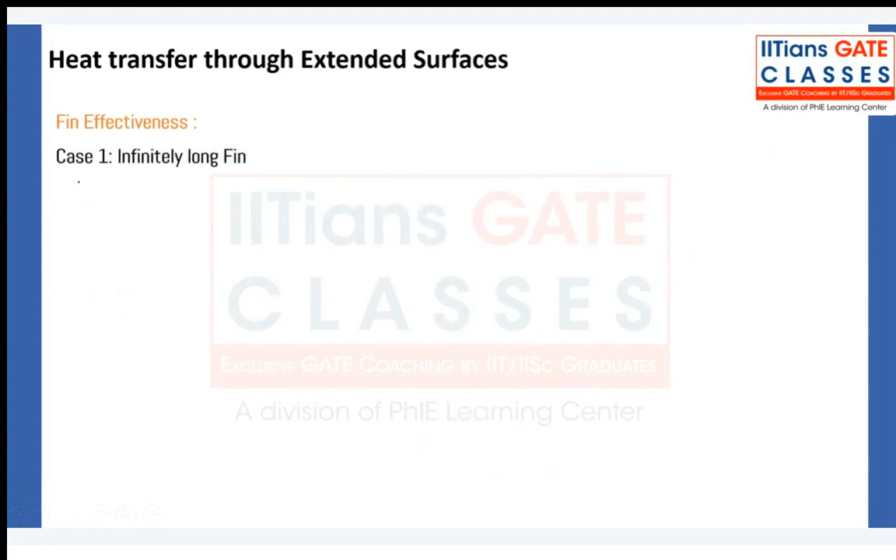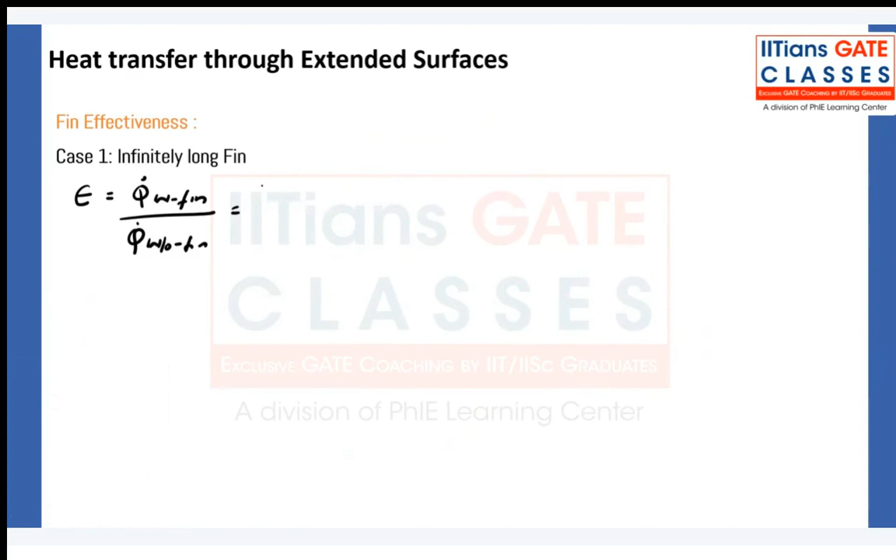So how do I compare this? How do I compare now, for an infinitely long fin? Effectiveness equals Q with fin divided by Q dot without fin. What is with fin? With fin is H P K A, under root, T naught minus T infinity, upon without fin is H area, T naught minus T infinity.

What is the area? This area, this area. So now I can write under root HPKA, T naught minus T infinity. In fact I can cancel it here, because area is same. Here also for conduction, this is the perpendicular area. And now what is this area? This area is again perpendicular. So the heat transfer area for conduction, the perpendicular area for conduction, is same as the heat transfer area for convection. Is it clear? Any doubt? Anyone any doubt with this?

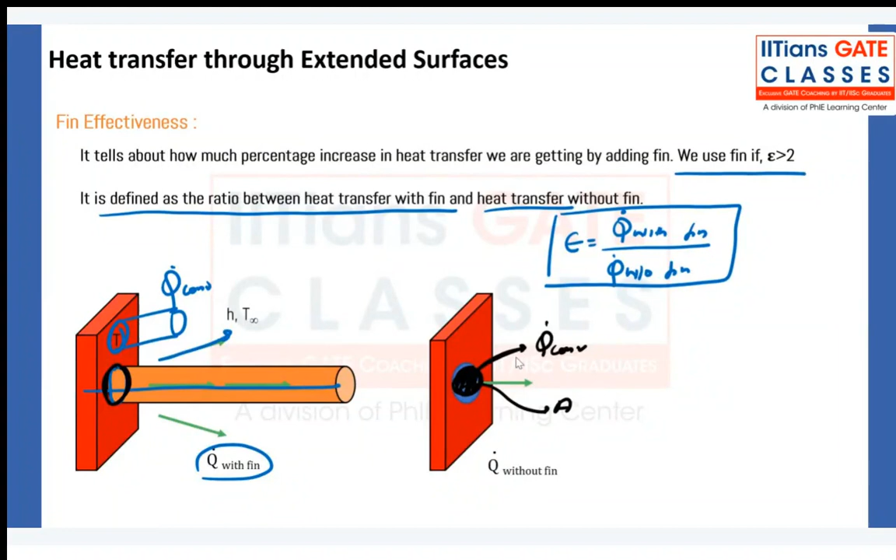Okay, so what can I do here? I can cancel this, and HA. So now what do I have? I have H and A will be cancelled. I have KP upon HA, KP upon HA.

Effectiveness of fin, for infinitely long fin.

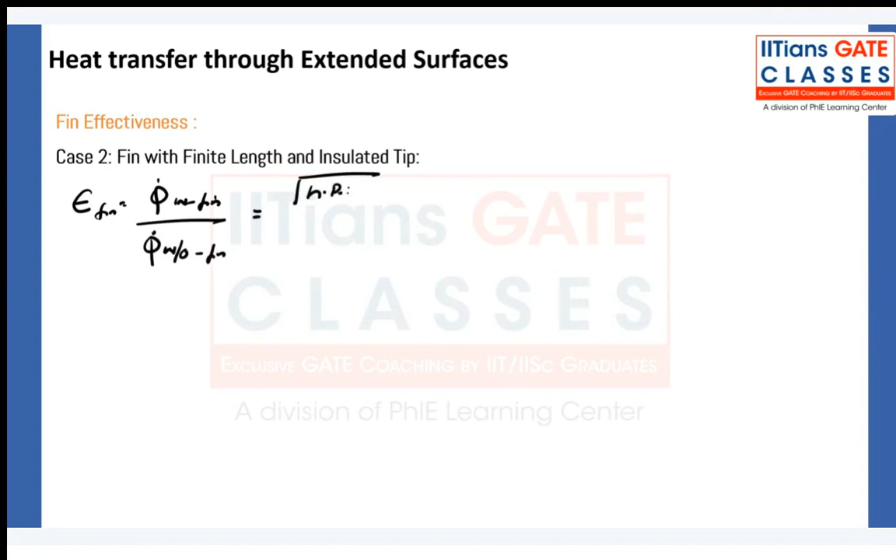Now, fin with finite length and an insulated tip. Again what will we do? Effectiveness of fin equals Q with fin and Q dot without fin. We again know what is with fin: under root HP KA tanh(ML), T naught minus T infinity. And here we have HA, T naught minus T infinity. So this and this will get cancelled.

And when you further cancel H and area, you will get tanh(ML) upon under root of HA by KP. Now do not confuse it with M. M equals under root of HP by KA. So it is not M, it is not M.

PK by HA. Yes, PK by HA. Yes, tanh ML. Yes, that is correct. Okay. Efficiency of fin. Okay, in this particular case,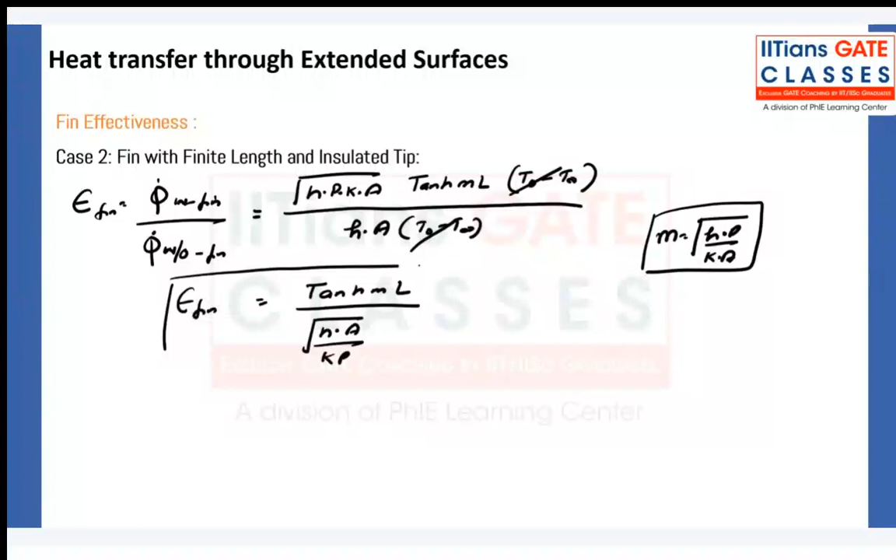Now, finally, conditions for justified fin. You cannot use fin everywhere. You can only use fin when, after designing and manufacturing that fin, when it is attached to your surface, it gives you at least sufficient effectiveness - it has increased the heat transfer to a significant amount. Otherwise, if it increases heat transfer by a very small amount, then you are getting very little advantage for so much cost. Then it is not effective, and the use of fin is not justified.

Now, in what conditions is the fin justified? As we can see in this equation, effectiveness of fin is proportional to under root of Kp upon Ha. So regarding fin material, whatever material of fin you are using,

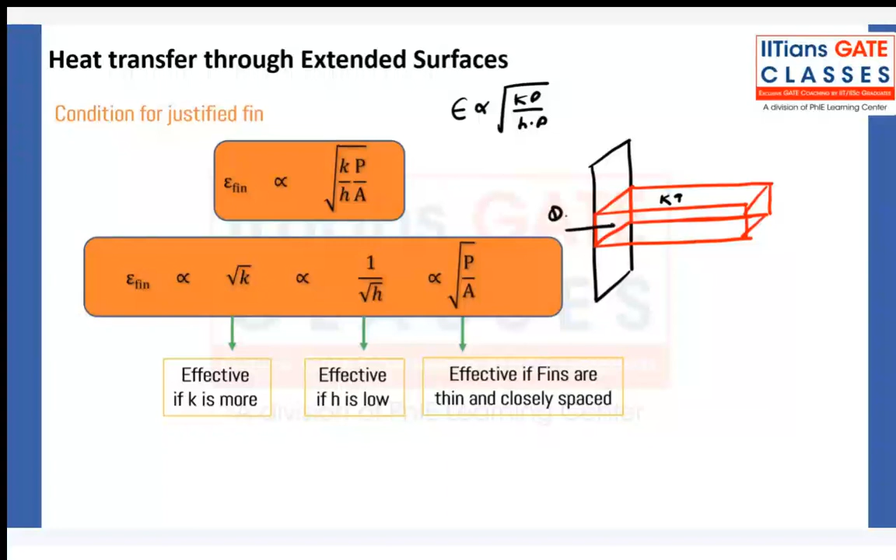whatever your fin material is, its conductivity must be high. Then only it will be able to increase the heat transfer by a significant amount. If the conductivity of material is low, whatever heat is conducted here will not be able to flow inside the material. If it cannot flow inside the material, it will reduce convection heat transfer as well. So conductivity must be high for the material.

Now second condition, heat transfer coefficient. For example, this is my base body, dipped in water. Now water has already taken the heat away at a very fast rate, because h of water is high - whatever heat is conducted here is given to the water, so q conduction equals q convection. Because the convective heat transfer coefficient of water is anyway very high, it is sufficient to take away all the heat. Now even if you are using fins, the heat transfer - because there is only a certain capacity to take the heat away, it cannot take away heat that is not generated inside.

It is already taking so much heat; even if you use fins, the heat transfer rate will not increase significantly. So you use fins only when the heat transfer coefficient is less. For example, if it is not dipped in water, but in normal environment, surrounded by air - air's heat transfer coefficient is low, much less than water. So with air, using fins is justified. With water, it is not justified.

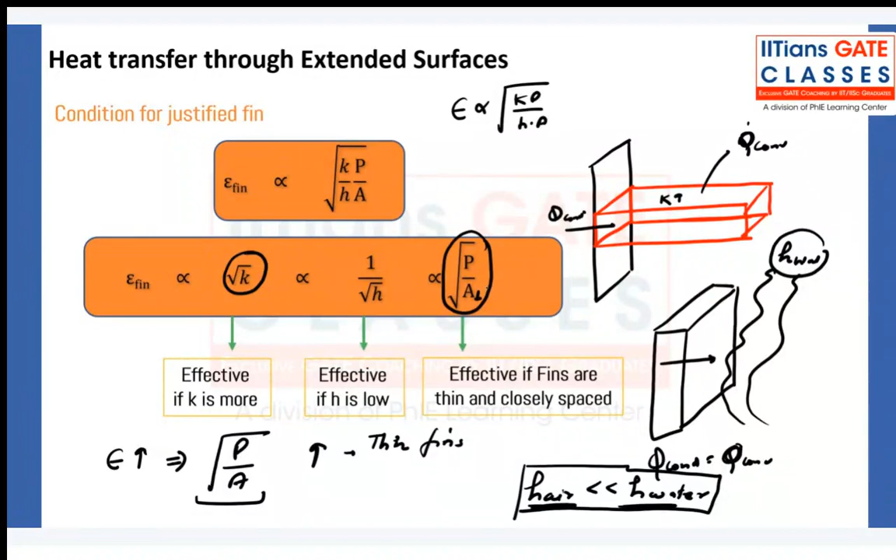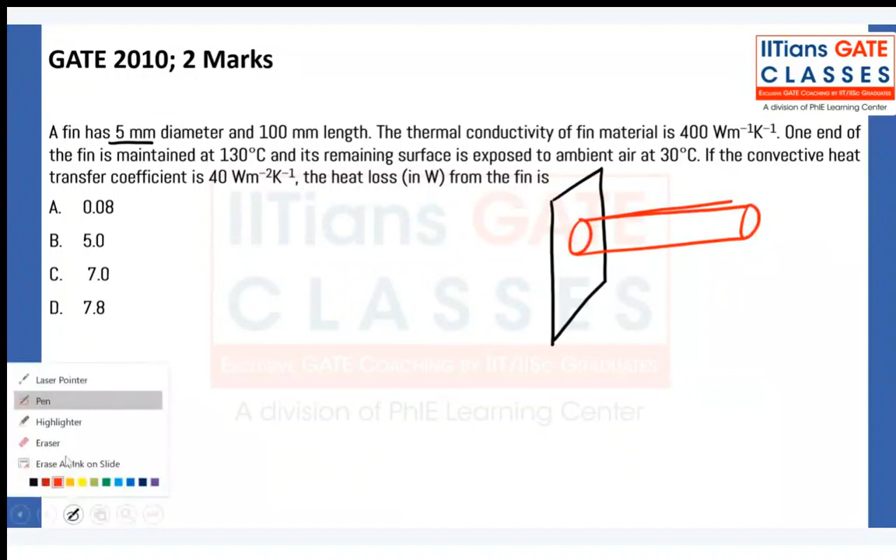Diameter is 5 millimeter and length. Now you see they have given us the length, that means it is the case of finite length. Now the thermal conductivity of the fin is also given, thermal conductivity of fin is equals to 400 watt per meter Kelvin.

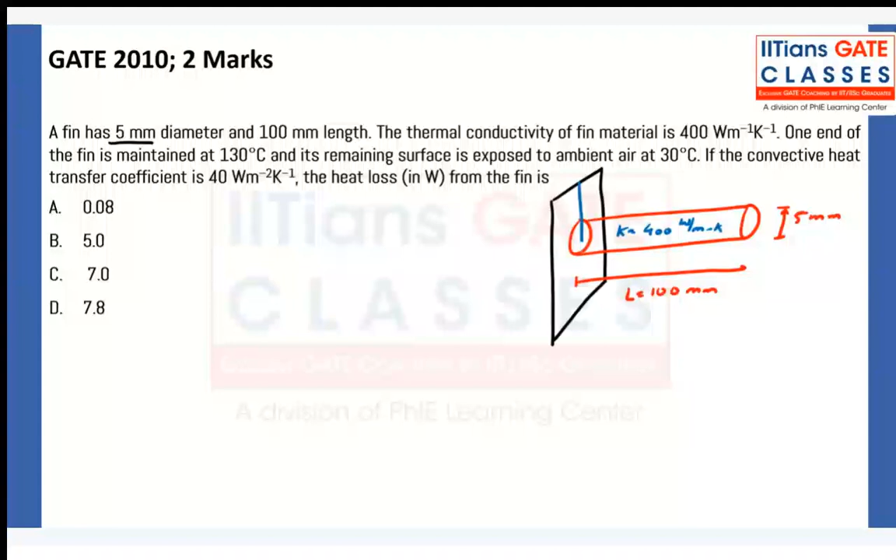One end of the fin is maintained at 130 degrees Celsius. So at x is equals to 0, it is maintained at T naught, which is 130 degrees Celsius. The remaining surface is exposed to air, and air has a T infinity of 30 degrees Celsius. Also, convective heat transfer coefficient is given as 40 watt per meter square Kelvin.

Now the heat loss from the fin, look, they have not given insulated tip or uninsulated tip. If they have not told us anything, you will always take fin with finite length. Finite length is given, yes, but insulated, uninsulated is not given. So you will always take insulated tip for finite length, otherwise they will give some extra information.

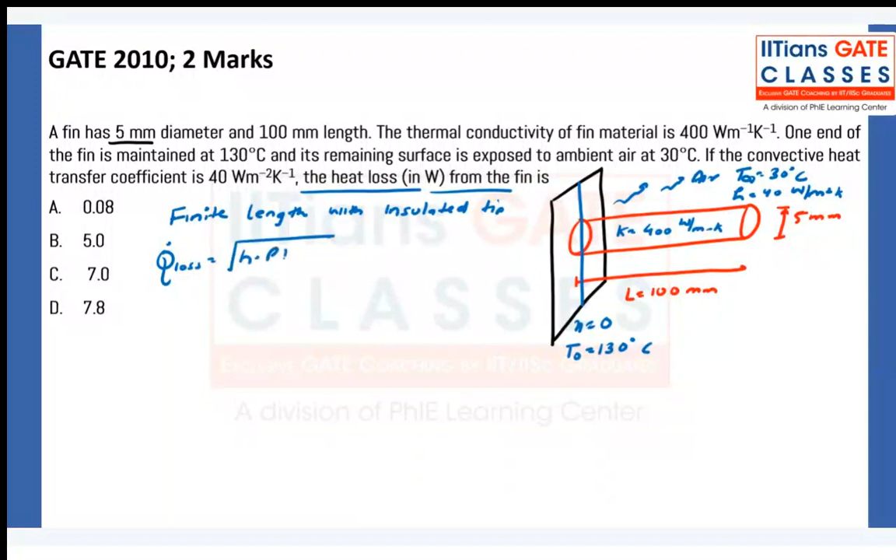Okay, now I need to find out Q dot heat transfer is equals to, can you tell me the formula? Under root HPKA, tan hyperbolic ml, into T naught minus T infinity.

Now I know more or less everything. H I know, perimeter and area I need to calculate. Okay, so let us calculate that.

Perimeter will be 2 pi r, or pi d also you can say. So it is equals to 2 pi into 0.0025. Area is equals to pi r square, so pi into 0.0025 square. How much is perimeter, how much is area, tell me?

Perimeter is 0.0157 meter. Area, how much is area? 1.96 into 10 to the power minus 5 meter square.

Okay, so now can you calculate m? M is equals to under root HPKA. So m is equals to under root h is given as 40, perimeter is given as 0.0157 which I have calculated, conductivity is 400, and this is 1.96 into 10 to the power minus 5 meter square. How much is m?

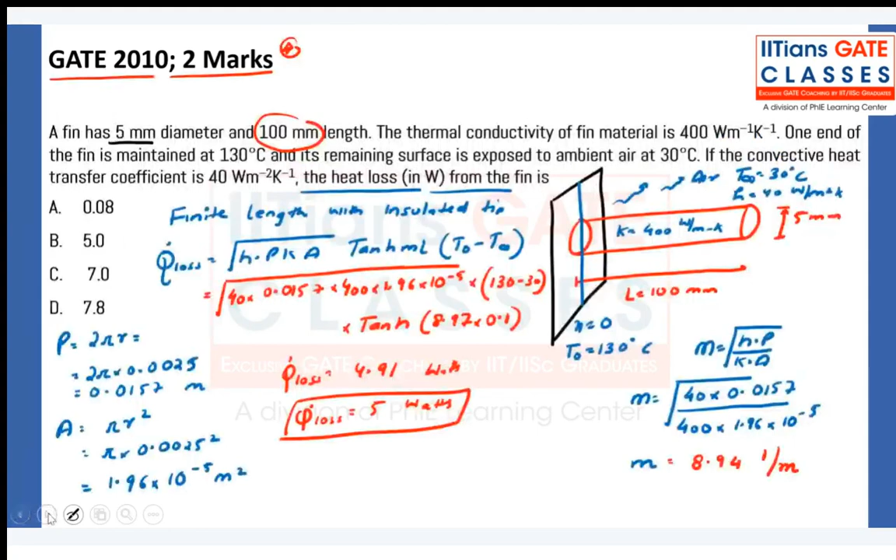Okay, let us move on to the next question. We have already solved this, I left a space here to solve it on a separate piece of paper, but anyway, chalo, theek hai. Which one of the following configurations has the highest fin effectiveness?

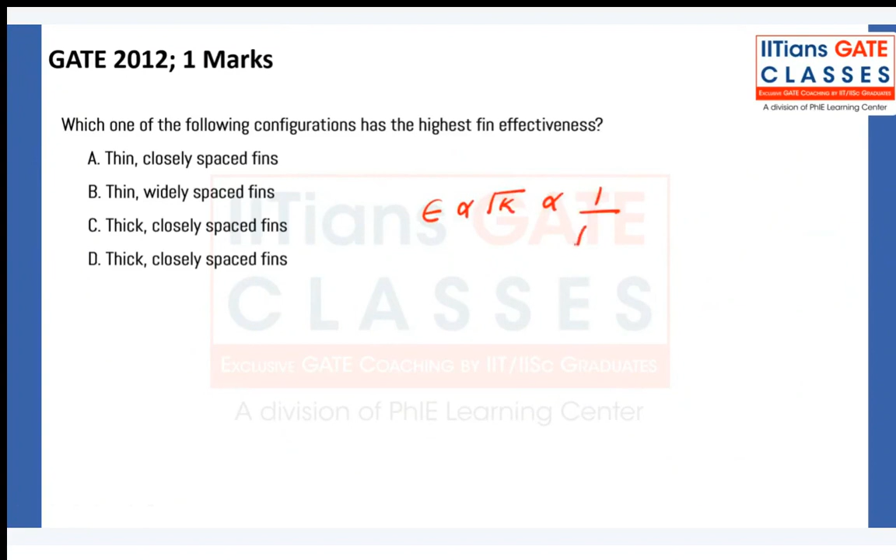Now I don't think I need to tell you this, tell me very quickly. Fin, thin, close. Yes, very nice. So we all know effectiveness of fin is directly proportional to thermal conductivity, inversely proportional to heat transfer coefficient, and P by A. So this you will get higher if fins are thin and closely spaced. So very nice, A is the right answer. Chalo, let us move on to the next question.

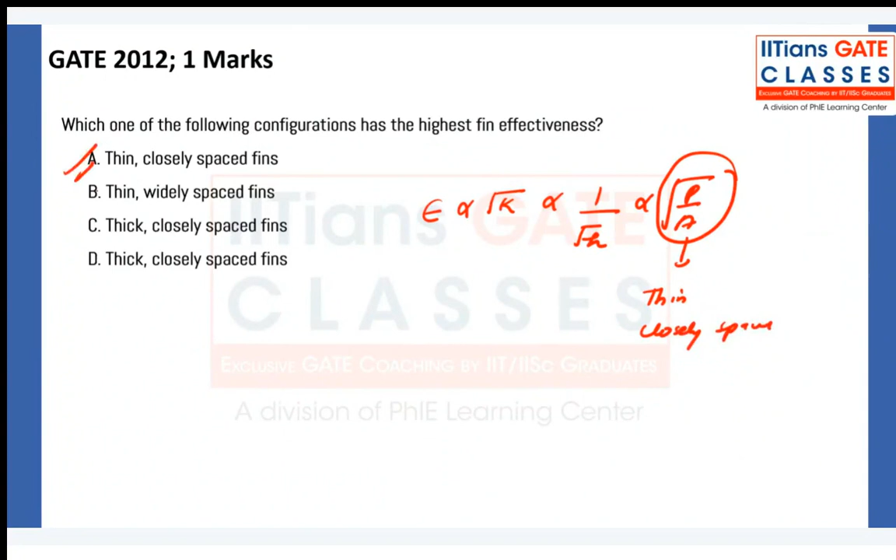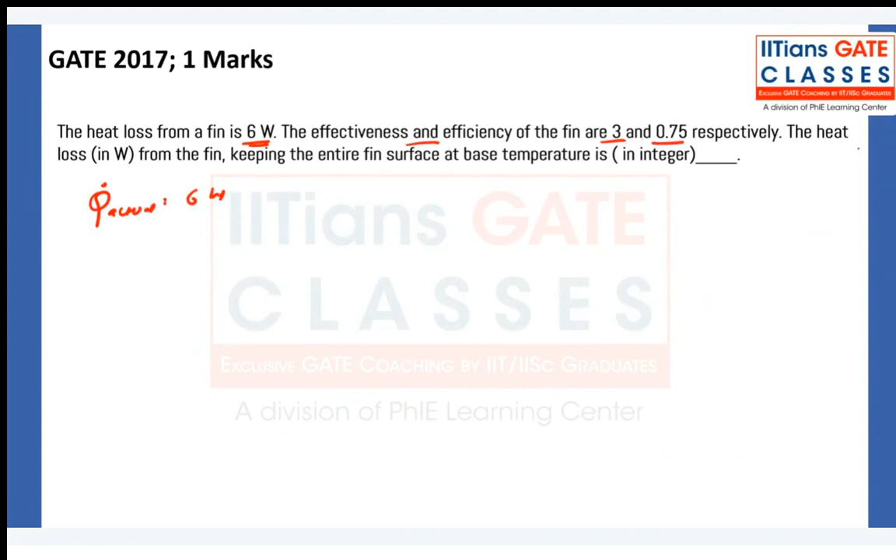Tell me very quickly, the heat loss from the fin. Heat loss that is happening from the fin is 6 watt, so this is Q dot actual. The effectiveness and efficiency are 3 and 0.75. The heat lost from the fin, keeping the entire fin surface at base temperature, if you are assuming the entire fin is at base temperature or root temperature, then you have to find out heat loss, how much is heat loss happening. What do you do? Will you use effectiveness or efficiency?

Yes, efficiency. Very nice. So efficiency of a fin equals Q actual upon Q maximum. Now Q maximum simply means that the entire fin surface is at base temperature, that is the assumption that we are assuming. So Q max is equals to 6 upon 0.75, and as Sahil and Sean have already calculated, it is 8 watts. It is a gate question itself, you see how easy it is. Chalo, next question.

Okay, last question. An infinitely long pin fin attached to an isothermal hot surface.

What do you mean by isothermal hot surface? It means the surface temperature will remain the same. If it is an isothermal surface, that means the surface temperature, let's say, will remain same as T naught.

It transfers heat at a steady rate of Q1. So let's say this is the fin we are using, and it is transferring heat Q1. Q1 is getting transferred, and the thermal conductivity, let's say this is K1.

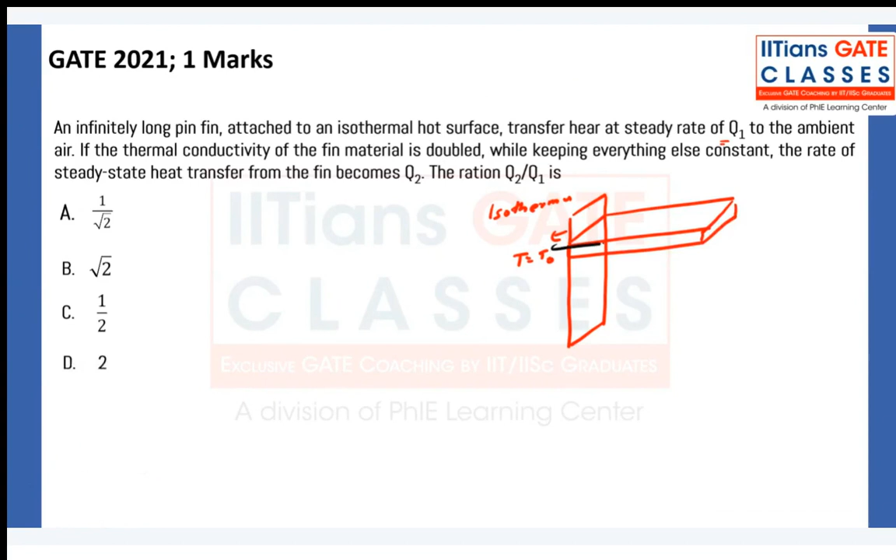Now let's say if you are using a different fin, the same heat you are transferring, actually it is Q2. Now the thermal conductivity of the fin material is doubled. Now it has K1, and this one is twice of K1. While keeping everything else constant, the rate of steady state heat transfer from the fin becomes Q2.

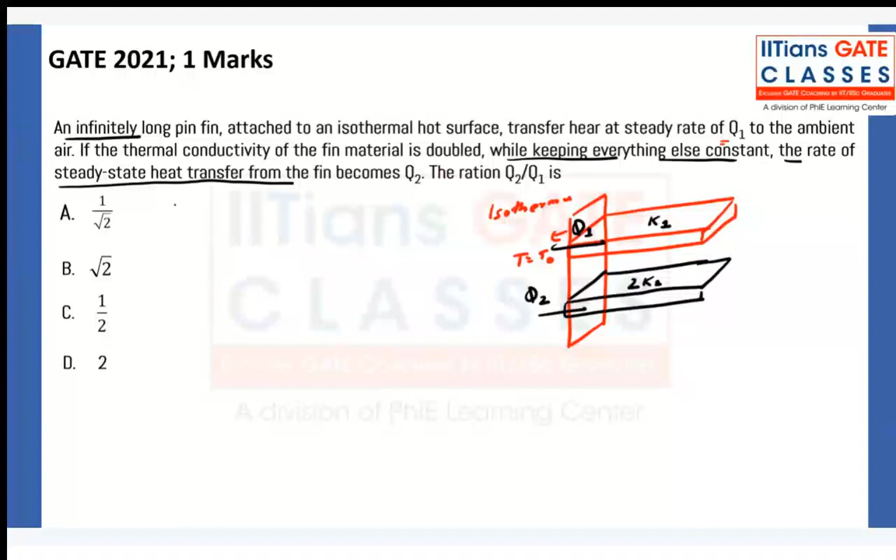So what do I know? It is a pin fin, an infinitely long pin fin. So Q1 is equals to... yes, that is correct, Sahil. Very nice, Sean is also correct.

Q1 equals root of HPKA times T naught minus T infinity. And for Q2, let's say everything else is same, H is same, dimensions are same, but it is 2K now, only the conductivity has changed: 2K1, area, and T naught minus T infinity. So Q2 by Q1 will be equal to root of 2K1 upon K1. When you cancel this, you will get root 2.

That is your answer. So these are the questions.

These are very simple questions, very simple questions come from Fin, although I think this is the only type of question they have asked. Try GATE 2022 also, you will get some questions. The other thing is now start solving practice questions. Fins is covered, everything we have covered in Fin.

Whatever questions you see, try solving them. If you have any doubt, ask me. Okay, so this is for Fins, now, okay, this is it.

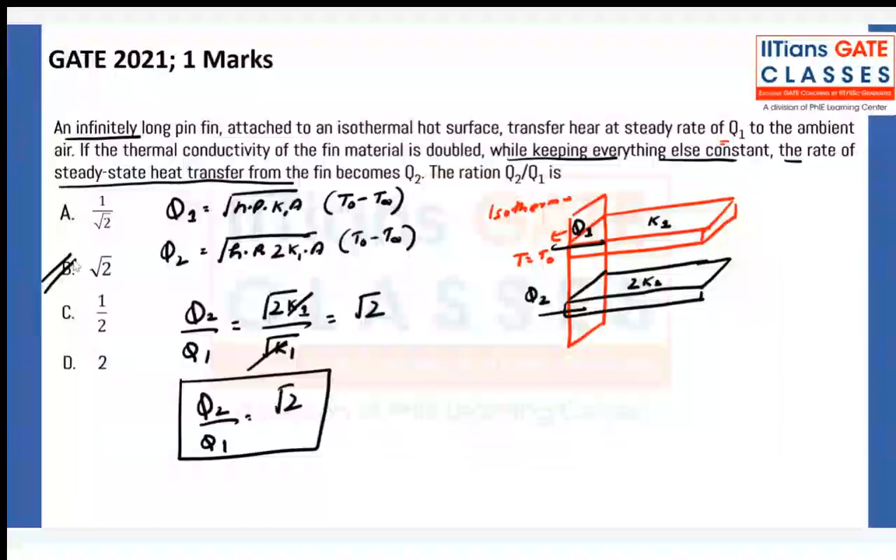Now I'll tell you one thing. What we have done yesterday and day before yesterday, we talked about generalized heat transfer equations. At that time, in the Fourier law, we have talked about steady state, one dimensional, and no heat generation.

Now, when day before yesterday we were talking about generalized heat conduction heat transfer, what did we do? We talked about three-dimensional, what will happen, and we talked about when heat generation is also happening, but we did not touch the concept of steady state. Steady state is still remaining, so we have to go see what will happen if unsteady, because

everywhere that day we were assuming steady state heat generation, steady state no heat generation, everywhere we were saying steady state. But what will happen if unsteady state will be there? Unsteady state means now 1 upon alpha, dt by d tau is not equal to 0, temperature is changing with time. So this is unsteady state heat transfer.